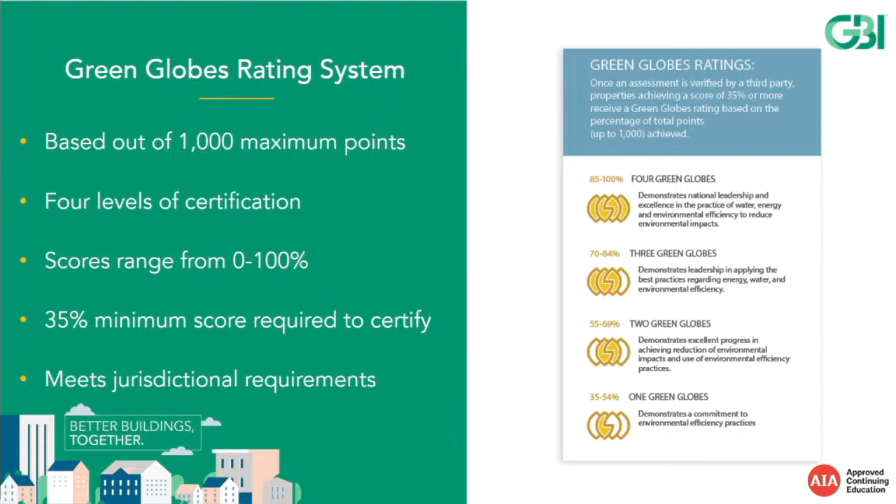And one thing that's really unique is if there is a municipality or a building or a state that wants to make sure that Green Globes is written into the work that they're doing, maybe their ordinance or their code, you have to meet the jurisdictional requirement in order to take your building through Green Globes certification. So for example, if you lived in Timbuktu and they had a very, very high ASHRAE 90.1 standard, we would make sure that you met that and that you're not getting around it just by certifying your building. So we really try to bake in the jurisdictional requirement so it's very holistic, and we're working with the community to uphold the standard that they have in place.

Okay, so I mentioned that we have 3 different programs under Green Globes. Today we're going to be focusing on new construction, and there are 6 different assessment areas under new construction: project management, site, energy, water efficiency, materials, and indoor environment. And this is our point allocation for all 6 assessment areas. Again, this is out of 1,000 possible points. You might notice that in the diagram, the 2 most heavily weighted are energy and water efficiency. That never changes. So while we don't have any prerequisites, you really have to achieve optimal amounts in energy and water efficiency for certification. Okay, diving into the fun stuff.

So the first environmental assessment area is project management, which gets 10%. We encourage written performance goals to be created by the team and owner group to be set at pre-design, so at the very beginning while you're thinking through your project. And that would include site design, environmentally responsible construction activities, water conservation, building envelope and moisture control evaluation, energy efficiency, materials, and indoor environment, all to be considered.

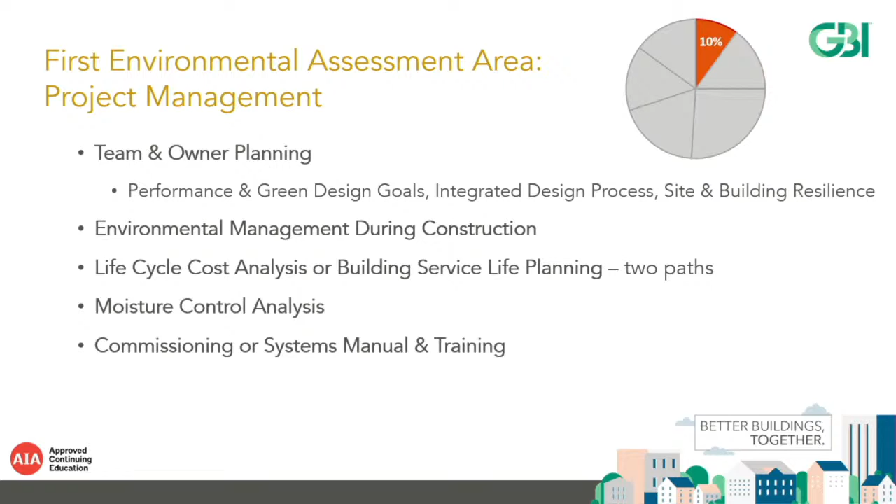So that's at infancy. We also require building risk assessments to be done, which would identify risks to the building, including continued building occupancy resulting from extreme natural events. So we want to look at global climate change, human activity, and the expected service life of the building. We also look at environmental management practices during construction, and if an environmental management system is in place or if it needs to be in place.

And project teams can also elect to perform a life cycle cost analysis or demonstrate a building service life plan. And these paths are weighted equally in terms of points. So we really try to encourage looking at the whole building and its life cycle. We also award credit for performing a moisture control analysis. Again, we look at environments that might be more prevalent in areas like Florida. And project teams can choose either a building commissioning and training pathway or a systems manual and training pathway.

You don't have to do all of the above. Okay, so this is just an example. I tried to find what project this is from.

David, maybe you might know. I was looking out the window. It almost looks like New York, but I couldn't quite tell.

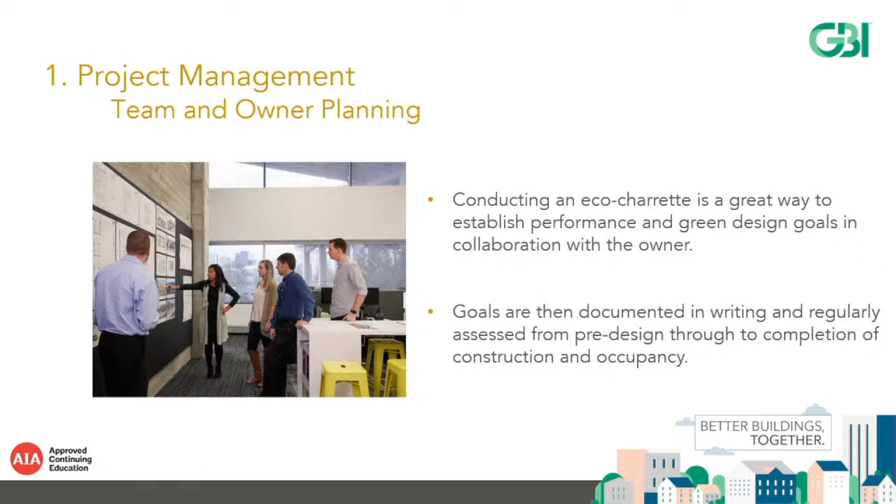An eco-charrette meeting with the building owner and various disciplines is critical at the beginning of design, as I mentioned, as they can dictate the sustainable vision for the entire project and life cycle of that building. The owner has functional goals for the project, of course, and that's based on the building type, the location, and their budget. And it is important to incorporate sustainability goals by weighing cost and the different benefits of the design elements that they're considering.

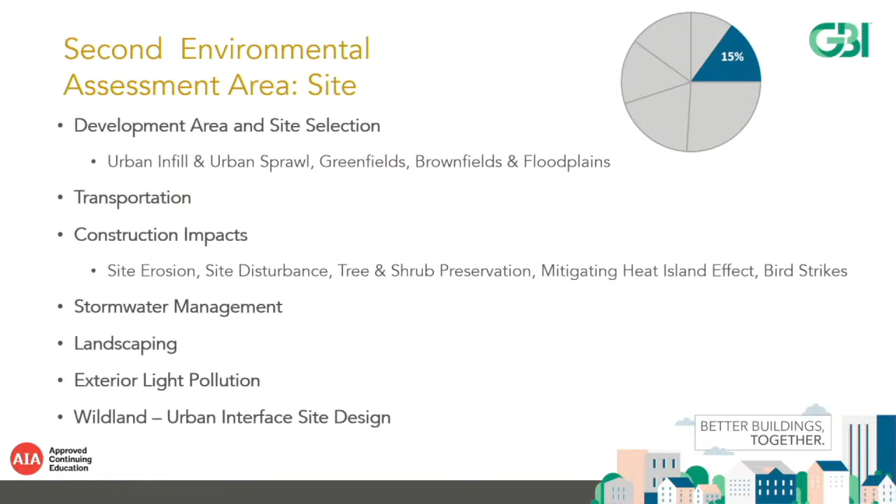Okay, so the second environmental assessment area is site. The first section of site is the development area, which evaluates various aspects of site selection, including consideration of urban infill and urban sprawl. Project teams are incentivized to choose a site that was previously developed and has been served by existing utility and transportation infrastructure, a brownfield or remediated Superfund site, and avoiding sensitive sites and different floodplains. If you build on a floodplain, that might be a little bit of an insurance disaster.

Transportation includes distance and feasibility to public transportation. And obviously, we're looking for methods that reduce dependency on single occupancy vehicles. I mentioned I work in policy. For whatever reason, 2021 was the year of EV charging stations throughout the country. Every state wanted to have different charging station laws that went into place during legislative session. So we were really happy to see that it's not just in certain areas like California and Utah that are very advanced in their different energy efficiency laws, but also down south where I live, we're also seeing a lot of EV charging stations put in place, which I'm quite proud of.

All right, construction impacts evaluate the measures used to minimize disturbance to the surrounding site, the protection of existing trees and shrubs, mitigating heat island effects with vegetation, shaded or high SRI roofs, and permeable surfaces, and measures that would address bird strikes. All right, so this is just a great example of someone putting a green space on their roof.

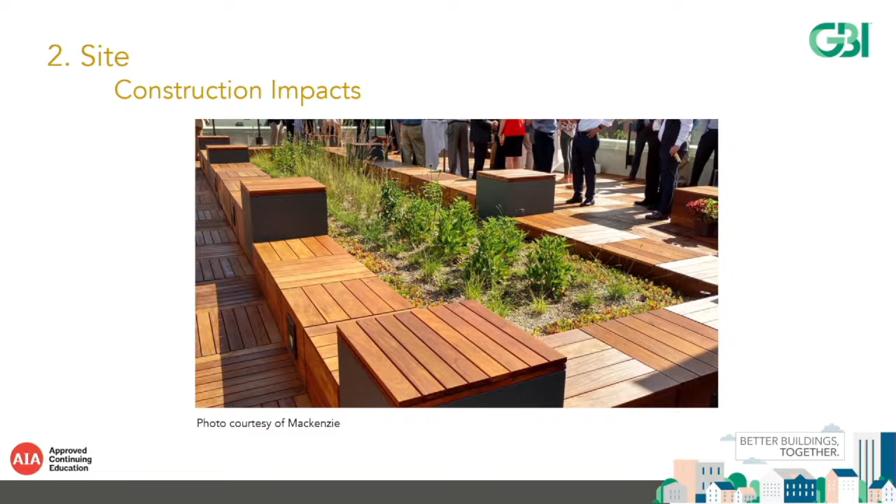We're currently doing some work in Boston right now, and one very cool thing that they're doing is putting beehives on a lot of buildings. So there's a portfolio that's building out, and they have beehives on each. So folks are getting really creative with the way that they're working with their space and using their roofs, and obviously we're quite proud to see that. A heat island effect can contribute to overwarming of buildings in warmer months, adding considerably to the cooling load, which increases the energy use. So we really like to see things like this.

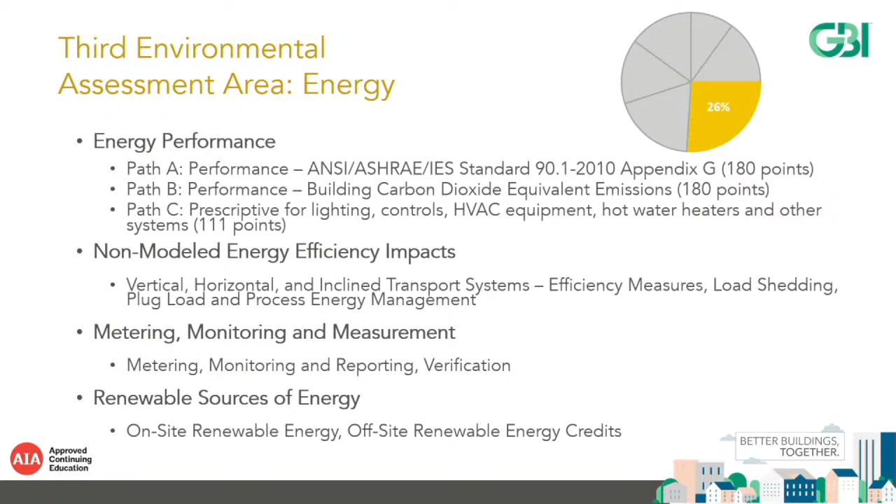All right. The third environmental assessment area is energy. I mentioned at the very beginning, this is what is most heavily weighted, and there are 3 pathways for assessing energy performance. Path A would be using ANSI/ASHRAE/IES Standard 90.1-2010. Again, if you're in an area that has a higher 90.1 standard in place, you still get full credit for just meeting 2010. We want to see folks go above code, obviously, but you would be rewarded a full 180 points. Performance path B would be building carbon dioxide equivalent emissions, which would also get you that 180 point threshold. And path C would be more prescriptive for lighting controls, HVAC equipment, hot water heaters, and other systems.

Non-modeled energy efficiency impacts are also evaluated. So think of things like elevators, escalators, and moving sidewalks if applicable. Lighting and HVAC systems capable of load shedding, appliances and equipment organized by location, and energy-saving power strips and occupancy sensors are all looked for as well. Additionally, credit for the implementation of a policy for all purchased equipment to be ENERGY STAR certified or meet another equivalent energy efficiency standard is awarded.

Projects earn credit for a percentage of the building's total site energy that is metered through building level energy meters, and there are 3 pathways for achieving credit for submetering in this assessment. We also look at both on and off-site renewable energy sources in the energy environmental assessment area.

Okay. So in the example projected on the screen, submetering was used in each tenant space to inform occupants of the rate of energy use and to incentivize them to reduce energy on demand. Generally, if occupants are made aware of how much energy they are using and paying for, they're more likely to

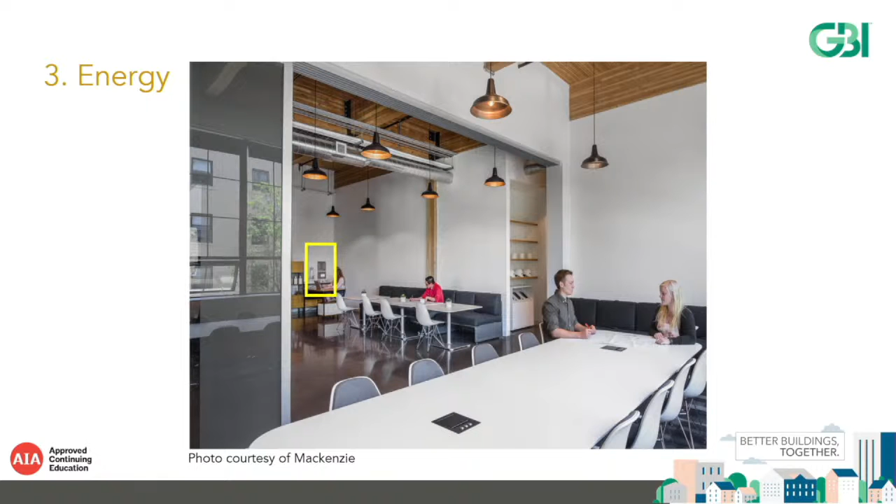conserve it. This reminds me of being a little kid and my mother telling me to turn off all the lights after I leave the room. Do you guys? Yeah, okay. I'm glad you both experienced that.

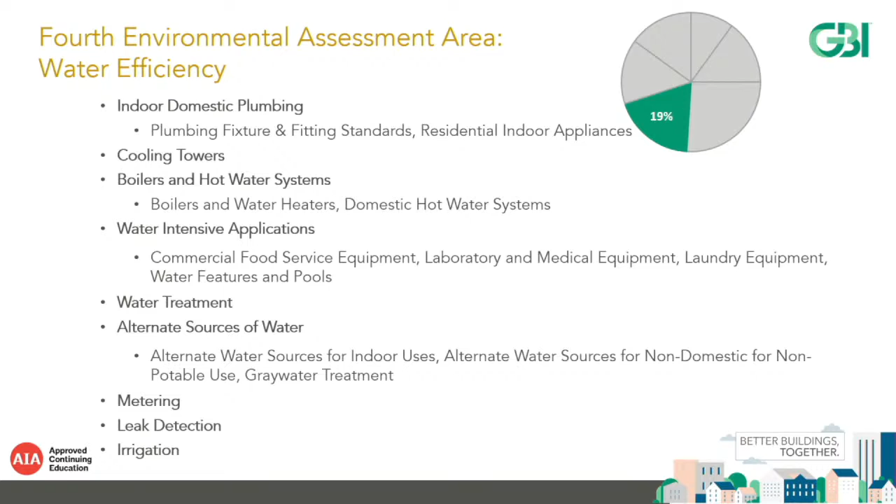All right, the 4th environmental assessment area in Green Globes for new construction is water efficiency, which is right behind energy for weighting. It's 19%. Water conserving fixtures, including WaterSense certified plumbing fixtures and ENERGY STAR appliances with low water factors, are always encouraged, as are cooling towers, boilers, and hot water systems, water intensive applications, including commercial food service equipment, laboratory and medical equipment, laundry equipment, water features, and pools if applicable.

Water treatment methods, alternative sources of water such as gray water and rainwater are also looked for, and submetering for all water-intensive indoor applications and potable water used for irrigation are also looked for. Credit is earned for meters and submeters that are linked to a meter data management system to meter consumption.

All right, so we actually awarded this project a Green Globes Award in 2021. It's quite unique, and they harvest all the rainfall in the ponds that you can see, and those are used to provide 100% year-round irrigation and flushing toilets, which is very cool.

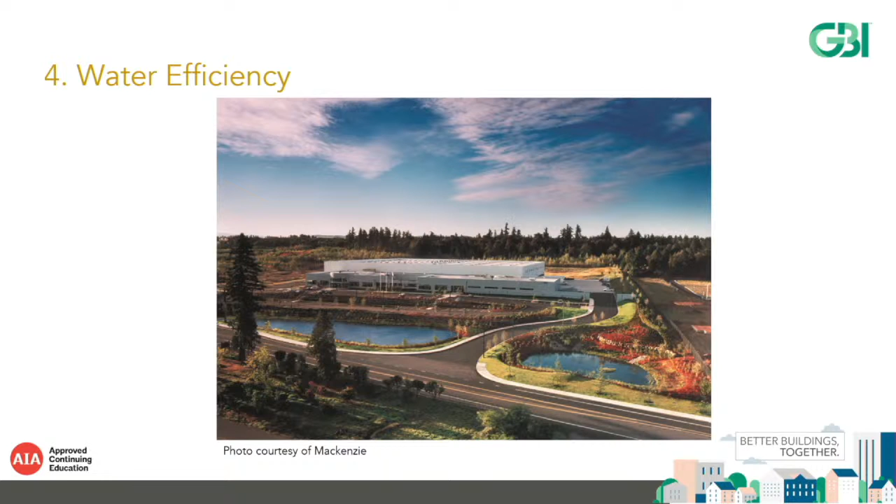All right, the fifth environmental assessment area is materials. Green Globes really encourages life cycle thinking from project conception. The first section evaluated is whole building life cycle assessments, and it evaluates reductions in environmental impact. Projects receive credit once 15% reduction in environmental impacts are demonstrated and can receive credit for 20 points or at least 25% for greater. Product life cycle is next under materials.

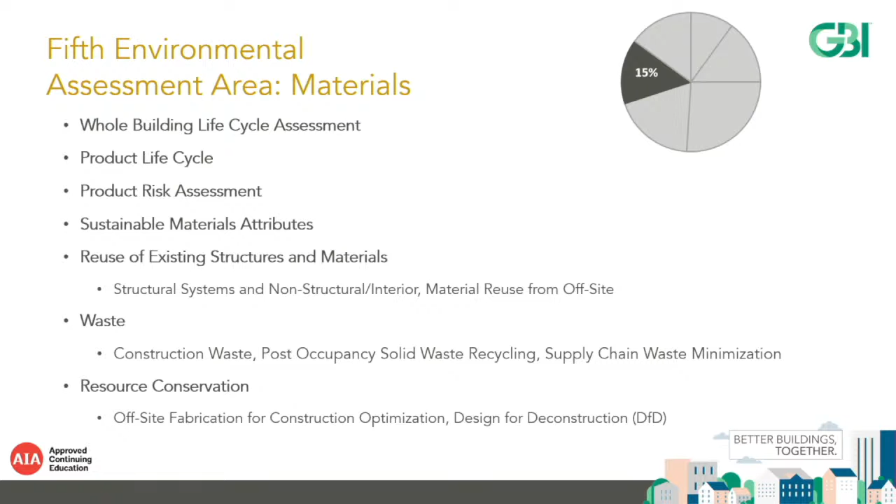We look for third-party verifications or certifications that evaluate cradle-to-gate product life cycles. Credit is also earned for sustainable material attributes based on the Sustainable Materials Index, or SMI, and the reuse of existing structures and materials are also evaluated as a percentage of structural systems and non-structural systems that are on the interior space.

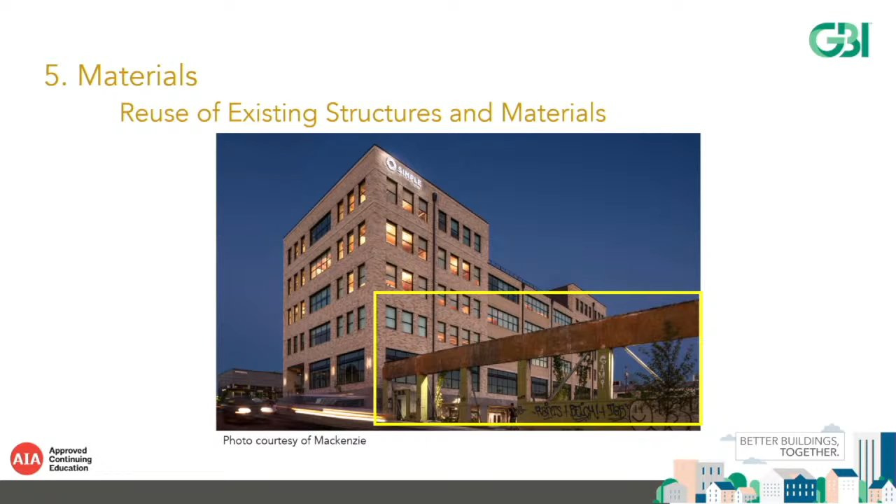All right, the building on screen was also built in the same space as the last picture, and it was on land that had a building. It was a warehouse that had been burnt down, and they used what land was destroyed and built up this structure that you see here. Many portions of the pre-development project were salvaged and reused and incorporated in the new building design.

The partial facade of the previous building was used as a screen for the on-site parking area, and actually this is in Portland, Oregon. They managed to save all of the graffiti because they wanted to give the building character, because they gave the space new life after that fire.

All right, the sixth and last environmental assessment in Green Globes for new construction is the indoor environment. Air ventilation and quality are the quantity of ventilation compliant with one of 4 standards or local codes. Air change effectiveness, air handling, equipment filtration, and CO2 sensing and ventilation control equipment are also evaluated in this section.

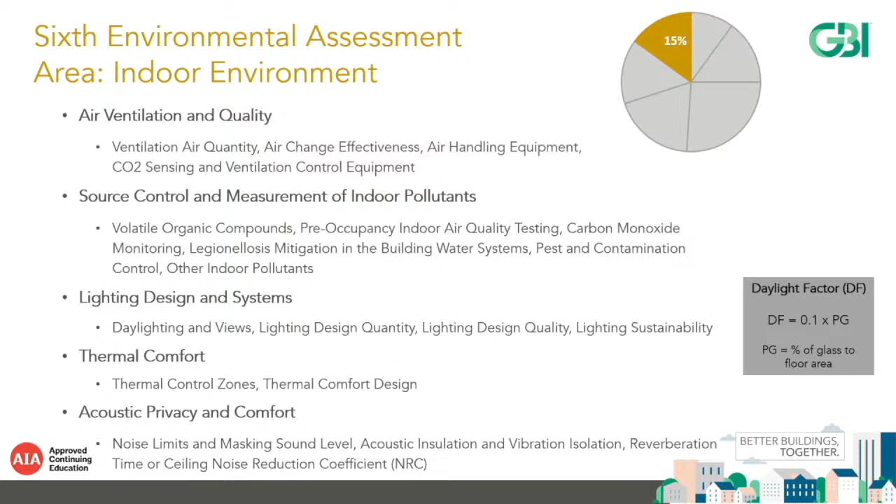Source control and measurement of indoor pollutants include evaluating and encouraging reduced volatile organic compounds, and there are 2 paths for achieving credit for pre-occupancy indoor air quality testing. So either carbon monoxide monitoring or evaluating if water systems have been conformed with ASHRAE 188-2018. Lighting design and systems are also awarded and encouraged.

Think of things like daylight. I remember when I first got into efficiency, circadian lighting was like the buzzword. So we really encourage lighting designers to have their footprint on the space as well. And we award for that. We also look for thermal comfort zones and acoustic privacy and comfort zones, including noise limits and masking sound level.

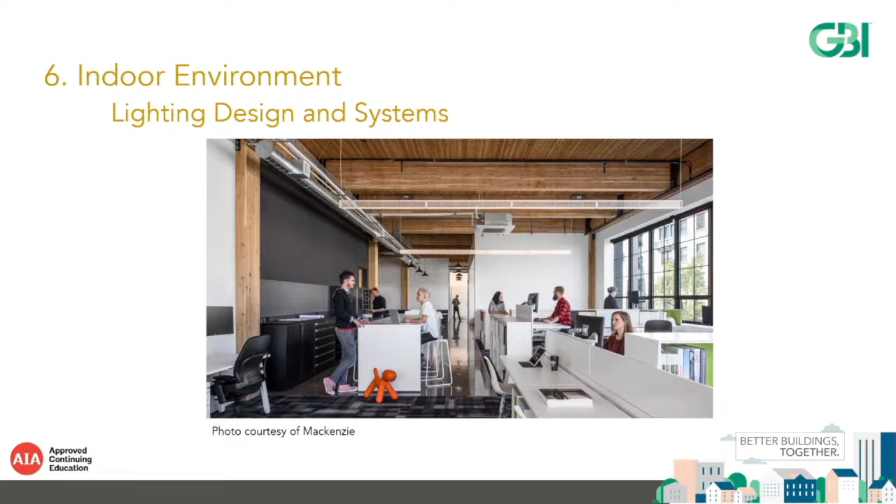High ceilings and high windows allow daylight to penetrate deep into the space. In this example, lighting controls automatically sense daylight levels, brighten when the sky grows dark, and dim when the sky brightens as well. These controls reduce the need for artificial lighting and thereby reduce energy consumption.

I work from home. I have a home office. We went fully virtual in 2013, and I do not have this type of daylighting, and I so wish I did.

And while we look at square footage for pricing, a new construction building that wants to go through Green Globes normally is at a price point of about $14,000, which is quite low compared to other certification systems currently at market right now. So we offer a few different resources through GBI.

Every building that goes through Green Globes certification is awarded a project profile. So we have a professional writer that comes in and authors a piece about the space. We also photograph it and we use it as a marketing tool, and this is free of charge. So it's really something that's unique.

Folks will often use it if they're in a university system or if they're sharing in a community what they've done on a whole portfolio. We really want to try and encourage them to take advantage of what we can do. If you're curious, we have a lot of our different buildings that have gone through certification for new construction on our project profile directory on our website, and you can tailor it for different certification types or area.

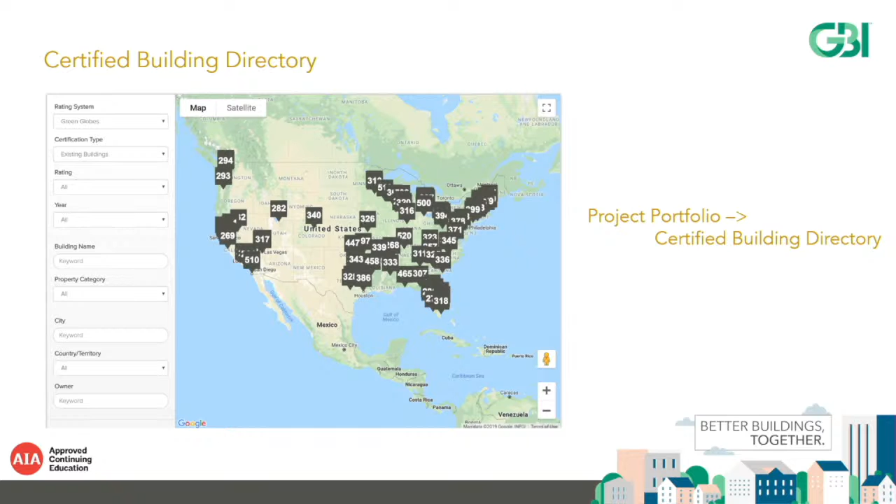So if you wanted to look at Utah and see some of the work that's been certified, you're welcome to do so. And again, we have a certified building directory as well. So if you're just curious to see the different buildings, I just looked at North America, specifically the United States here. However, we do offer different ways to check out the buildings that we've certified and if anything around you has been certified as well.

I mentioned our fee structure, but again, it all depends on square footage. And really what we see now, I checked again this morning, it's right at about $14,000 to certify through Green Globes for new construction. You can see here that we have a design review assessment and final assessment. We have something called a Green Globes assessor, which is someone that has 10 plus years of experience in engineering or architecture, and they work with the project teams through certification.

And what I think is really cool is when they're doing these design review assessments, they often can point out what project teams can do to be more resilient, more efficient. They can definitely suggest different changes so that building types can do as much as they can to achieve optimum energy savings. So it's really something that is quite collaborative.

And then we definitely send them out. That assessor travel is something that we have as a flat fee, and they come out and do that final assessment at the very end and work with the project team. So we don't expect folks to certify in a black box. We really encourage them to be as collaborative as possible.

Our client service team at GBI works with every project very, very closely, which David can attest to. And so it really is a collaborative process. No one's alone in certifying. You have either your assessor who you can contact, and they're normally familiar with a different space, or you can work with GBI directly through our client service team.

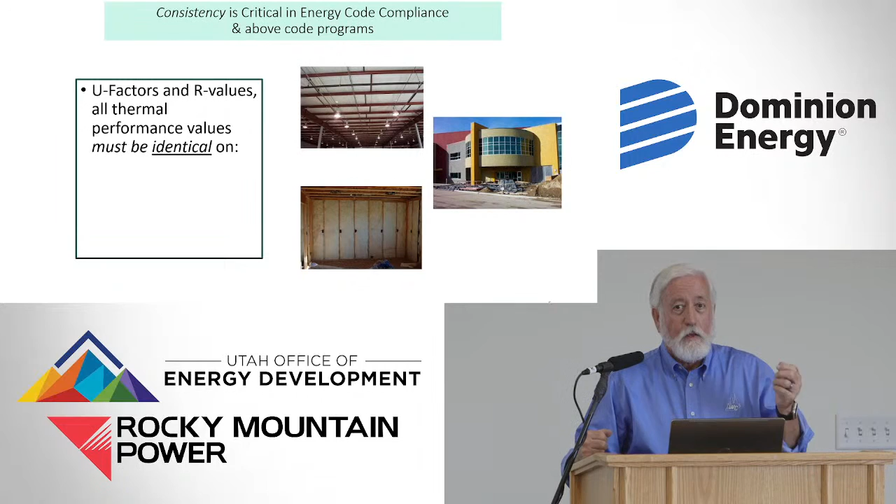Okay, my soapbox, and Carl and others that have heard me talk before know that I will jump up on a soapbox and I'll say our biggest problem in building buildings efficiently and accurately is to have complete construction documents. And I love the process that you have to go through for Green Globes, because we make sure, and there's checks and balances.

I've done inspections. For those that don't know, I was a HVAC contractor for 33 years, and then I was a building inspector for 13 years. And I've done inspections, and I get to the end of the building, and the windows are wrong, or the HVAC system has some deficiencies, and it's all done. And whether it was the ME or the architect or the contractor, someone made a mistake along the way. And if we don't have good, complete construction documents, and that's not just the plans, but it's all the associated documents. In fact, you have a whole list, and I think I grabbed that slide and maybe even have it in here. If we don't address all those things, our project is not going to be the project we want it to be.

As a contractor, there literally were jobs that I wish when I was approached to bid that job that I'd written them a check for $10,000 and said, go get someone else to do it, because everything was wrong with the project. The documents weren't good, the supervision was horrible, everything was poor on the project. And so the project was just a pig that everybody lost money on. And so it might look like a lot of steps you have to go through, but they're so important. We're bringing hundreds and thousands of people together to create this building, and if we don't have a plan and a process, we're not going to get it right.

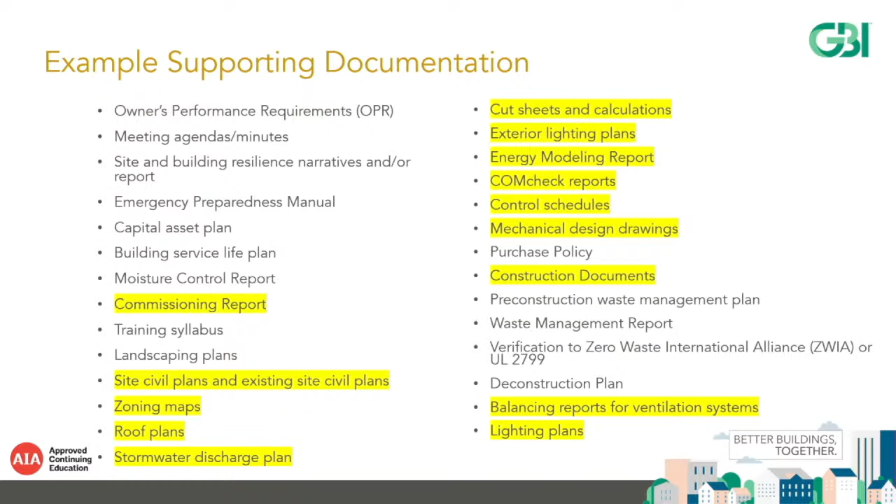And here's your list. And I highlighted things that I look for. You know, I've done some third-party plan review. I still do some since I retired from the county. And these are all the things I look for, you know, and they're on your list and they're on my list. These are important things.

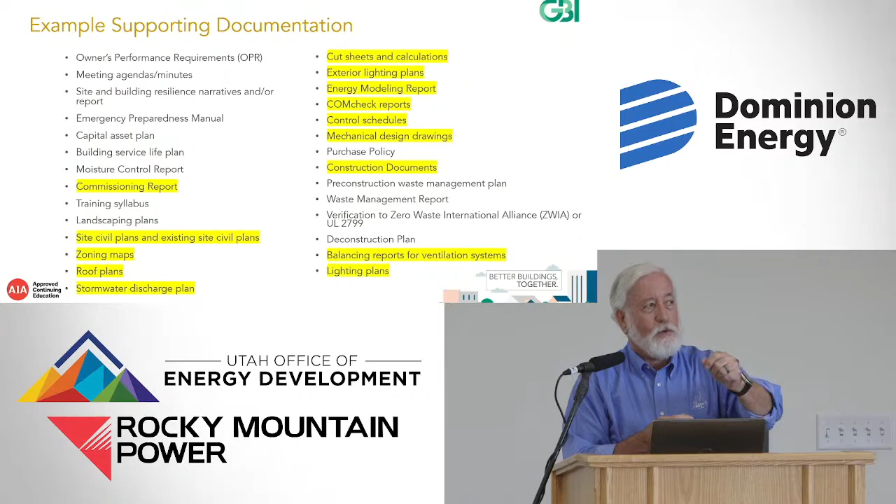Balancing reports for ventilation systems, you talked about that. You know, we have this challenge, and you two were talking about it with COVID. Some people went overboard and brought in way too much outside air, and the systems couldn't handle it, and the equipment couldn't handle it. So we have to be a little bit careful on that. In fact, bringing in too much outside air is just wasteful.

So we have balance points all over the place. We have to spend some energy for comfort and health, and we have to be mindful that the energy code recognizes that and doesn't get too rambunctious on that. What I'm trying to cover today, I could take 2 days, so I'm just going to go real quick.

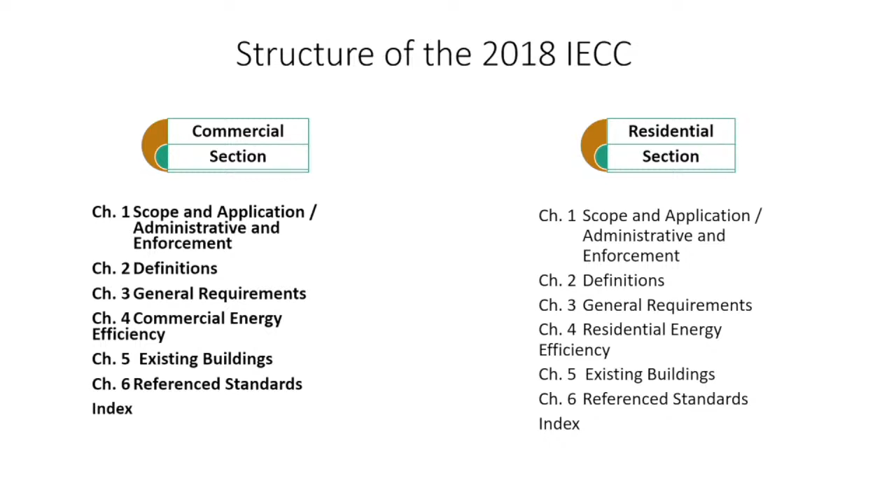The structure of the IECC and the structure of ASHRAE is not that much different. IECC is divided into 2 sections, a commercial and residential section, and they are like any other code. We have Chapter 1 administration, 2 definitions, 3 general requirements, 4 kind of the meat and potatoes of the code. And then fortunately, a couple of code cycles ago, we were able to remove existing building requirements and put them in a single chapter. So if you're doing that building remodel or alteration, you have one place you go to and you identify what you have to do rather than trying to piecemeal pick it out of the code.

When does my building need to comply with the commercial provisions? And we're talking a commercial above code program here. As I looked through your slides, you have certified or recognized a lot of apartments. Well, is an apartment residential or is it commercial code? Well, ASHRAE is the one that started this. 90.1 is for commercial buildings except low-rise residential.

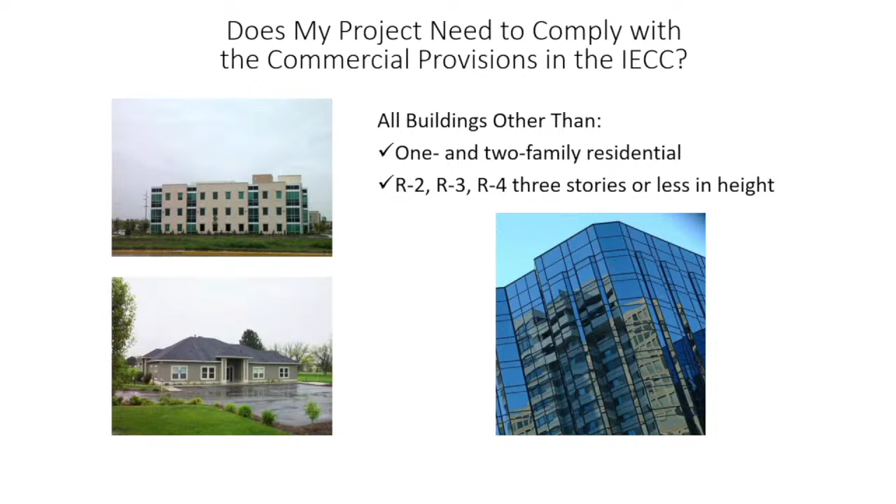So by definition, for both ASHRAE and IECC, a commercial building is any building other than a 1 and 2 family residential building, R-2s, R-3s, and R-4s, 3 stories or less in height. Let me simplify that because most of you don't know what an R-2, 3, and 4 is. Basically, a hotel and motel is an R-1. Every one of them is commercial no matter what.

The 2s, 3s, and 4s are apartments and boarding houses and stuff like that. If they're 3 stories or less, they have to comply with the residential code. If they're 4 stories or more, they have to comply with the commercial code. 1 and 2 family residential, of course, that's a residential building. And people will say, well, what about townhouses? Townhouses are single family dwellings with a 0 lot line, so they always fall under the residential. So we're talking the commercial.

But our commercial can get a little bit interesting sometimes because it's very popular right now to build a 1, 2, or 3 story building. Sometimes we have some retail and some rental units on the same level, or we go up to 3 levels. Well, if you have that building 3 stories or less above grade, you do those levels that are residential dwellings out of the residential energy code, and you do the retail space out of the commercial code. It gets a little confusing, but oh well.

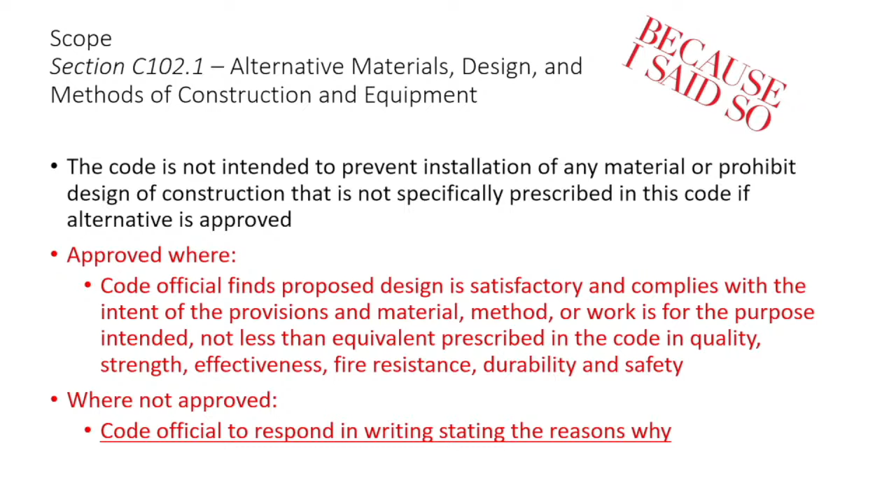I'm not going to read this whole thing, but this is one of those things that I fought for in code development that I thought needed to be there. The beauty of above code programs is that they give you some options and some flexibility. Well, the code is not intended to be the only way you build a building. The code says we're not trying to prevent using a different method. All you have to do is submit it and get it approved.

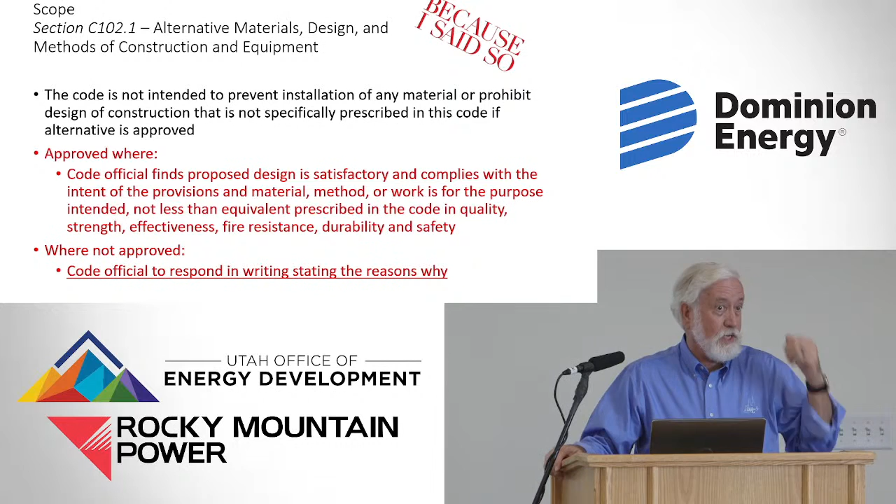For a long time, I had people call me that wanted to do something a little bit different. They submitted it to the jurisdiction, and the code official would say, nope, I'm not going to accept that. And they say, well, why not? And he says, because I said so. Does that sound like what my mom said to me years ago? The code now says that if the code official doesn't approve that, he or she has to state in writing why. And I think that's a good addition to the code.

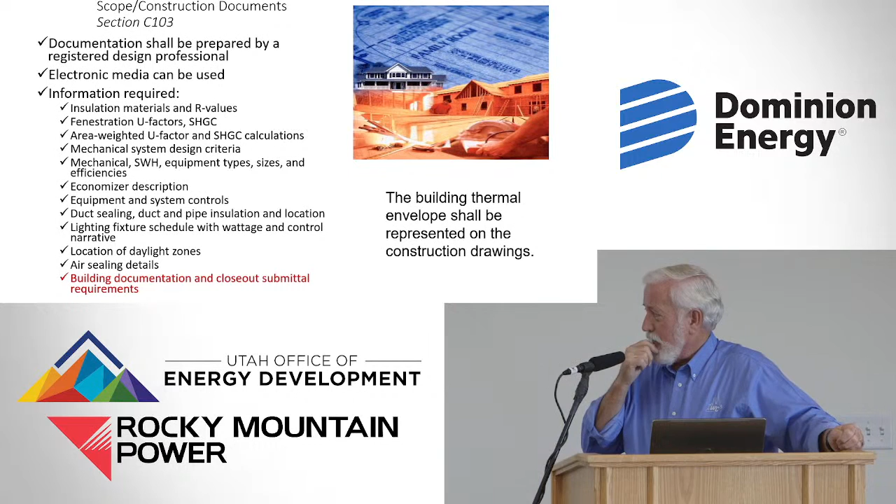Here the code identifies all these things that should be on our documentation. And you notice some red. That means that is a new change in the 2018 code, which is the last code that we adopted.

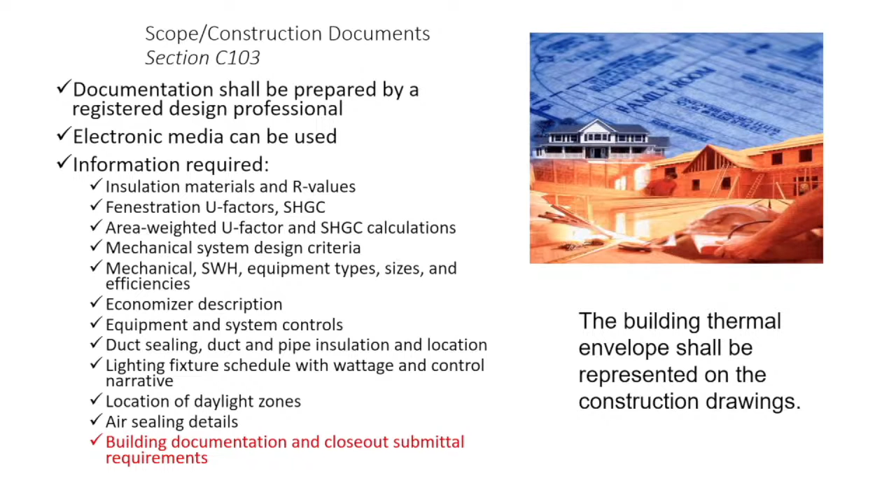And there is a big push on our larger commercial buildings now, and the code has recognized it, that we need building documentation, we need commissioning and all that stuff, and it needs to be submitted as we finish up the building. And also that we identify the thermal envelope.

I have to throw in a word about the building thermal envelope. We have COMcheck, we have, ASHRAE has, you know, Appendix G, they have a number of methods that you can comply with the code, but every one of them looks at the thermal envelope. What separates conditioned from unconditioned space?

And we talked earlier about air leakage, infiltration. Well, we need to identify on the plans now where that air barrier is, where are we stopping air leakage? And so that's an important thing that we think about. Don't build a building, pressurize the building, find the leaks and go fix them. Let's identify where it is so that we know what steps we have to take as we move through.

So how do we comply with the code? We can use ASHRAE 90.1, and currently in Utah 2016 is the adopted version. Or we can use IECC, and we can basically go the prescriptive approach, and we're going to talk a little bit about that. And when we do that prescriptive approach, you go through, you comply with everything, and then when you get finished, you have to pick one additional efficiency feature. And we have a whole list there, and we added 2 more in 2018. And so I think we have 8 of them now.

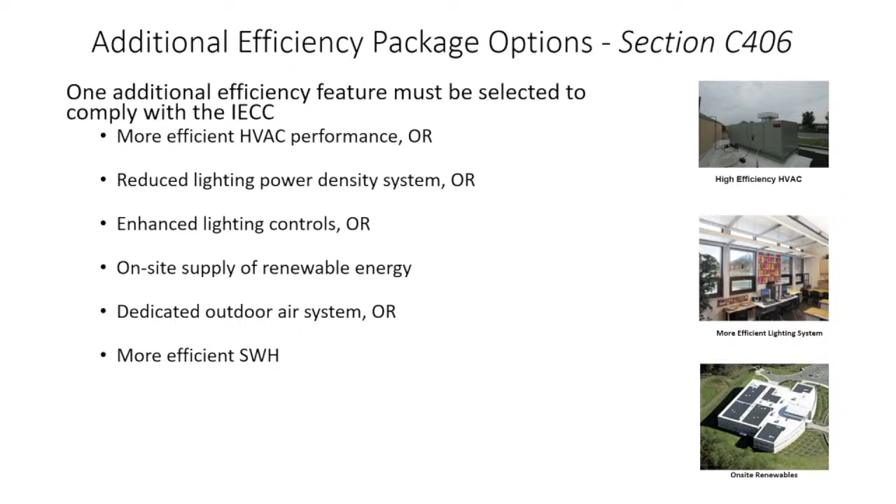More efficient service water heating. This is only available for uses that use lots of hot water. Hotels, motels, maybe some schools. It's not available for everything. So every one of them has some qualification requirements on it. Enhanced envelope performance, which means you're going to test the building and come with a lower leakage. Oops. And reduced air infiltration, which are both new in the 2018 code.

So what is the thermal envelope? It's the roofs, the walls, the fenestration, skylights, floor edges, slab edges, below grade walls.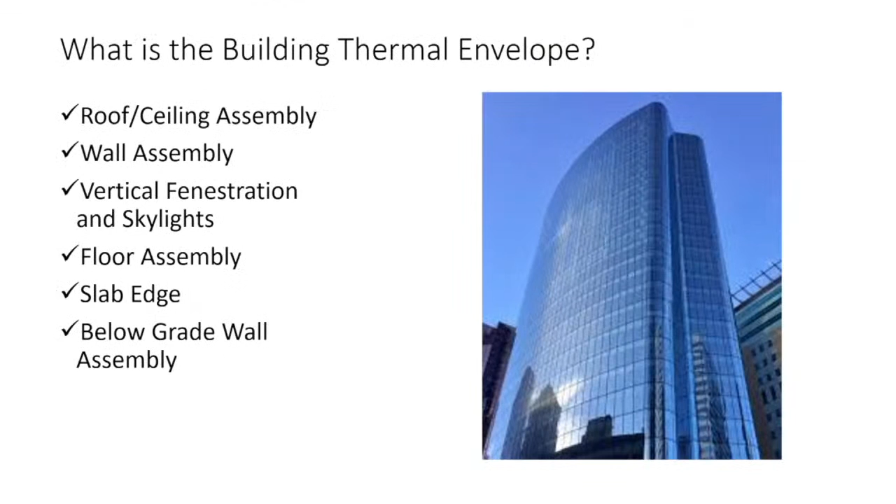I had an apartment project, it was like 6 stories high, submitted for review. I sent it back and I said, you need to put every component of the building thermal envelope on the ComCheck document. And they had left the floors out. It was a podium slab, parking underneath, multi-family apartments on top. And he hadn't done anything for those first floor units that had cold space underneath, cold concrete, cold slab edge on the edge of that.

And finally I called him up and I said, this is the 3rd time and you still haven't addressed it. And he says, I can't. And I said, well, why can't you? If I put it in, it won't pass. I won't say exactly what I thought, but you can guess. Of course it won't pass. You left out an important component of the thermal envelope.

ComCheck or any system doesn't know what the building looks like. You have to put in what the building looks like, and you have to put in all of the components of the thermal envelope, or it's not right. We don't get the right building. So with that type of application, we have a problem because we have a slab edge that's really hard to insulate, and a floor underneath that's kind of hard to insulate. But we need to be thinking about it.

I'm just tickled to death because I started on the code enforcement side in 2005, and we really struggled with concrete buildings, tilt-up buildings, and CMU and all those things. And I'm seeing so many tilt-up buildings now that they're sandwiching foam between 2 layers of concrete, a structural layer and then just a cladding layer and structural foam, and it really makes a great envelope. It doesn't leak air at all, and it has mass, and it has good insulation. So we are making progress. It's just taking a little while to get there.

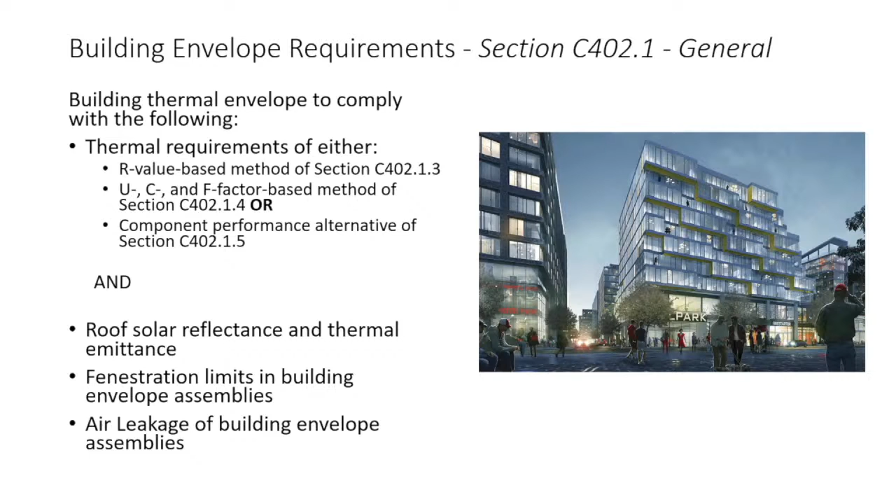And so how do we comply with the IECC? We have either an R-value based or a U, C, F factor based or a component modeling approach, and I mentioned this at the first, prescriptive covers the first two, the R and the U. And then we have some very specific requirements for roof reflectance and fenestration limits and air leakage. So here's our options. And we have similar options in ASHRAE.

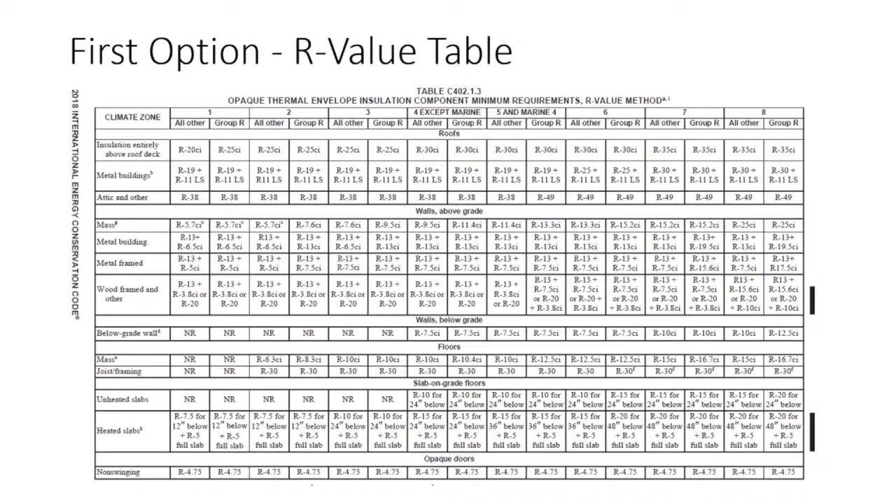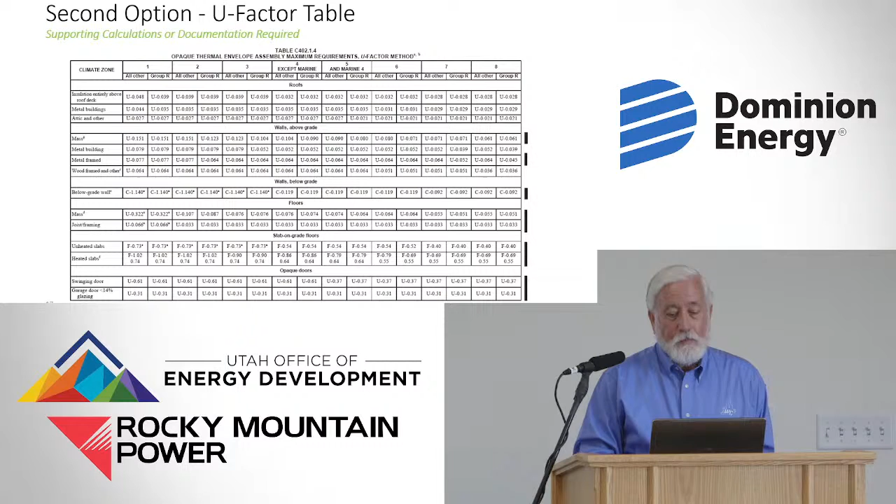You can't just do the inverse of, say you put R19 in that wall, you can't go 1 divided by 19 and get the U because you have the studs that provide some thermal bridging, so you have to come up with assembly U-factors. When we use the term U-factor, we're looking at an assembly, and we have to account for everything in that assembly. And so with a U-factor table, you have to have supporting calculations or documentation to use that table.

There was one R19 batt in a metal building roof system, and they double dipped and tried to, they didn't obviously know what they were doing, which shows a building that's really going to perform great because continuous insulation has what? No thermal bridging. It works very well. So that was a problem.

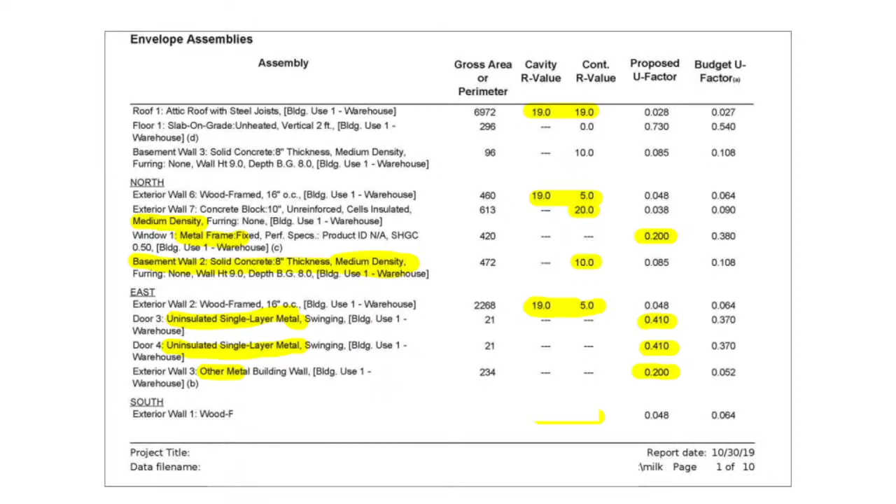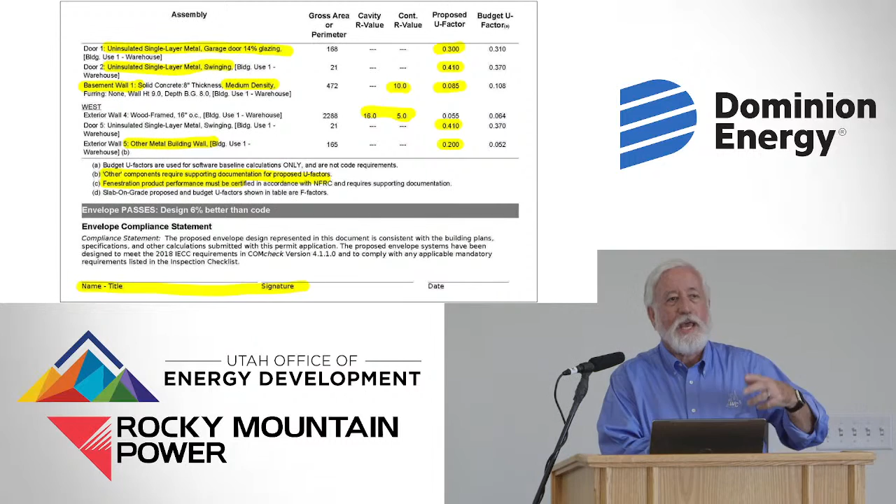Same thing as we go down. An uninsulated single layer metal door with a 0.41 U factor. I don't think so. Then they have other metal building wall, 0.2 U factor. Soon as you see other in a COMcheck, if you'll notice footnote B, other components require supporting documentation. It goes back to the thing. We just can't pull a number out of the air, throw it on a document and say it works. I love the process that you go through of having these checks and this verification as you go through.

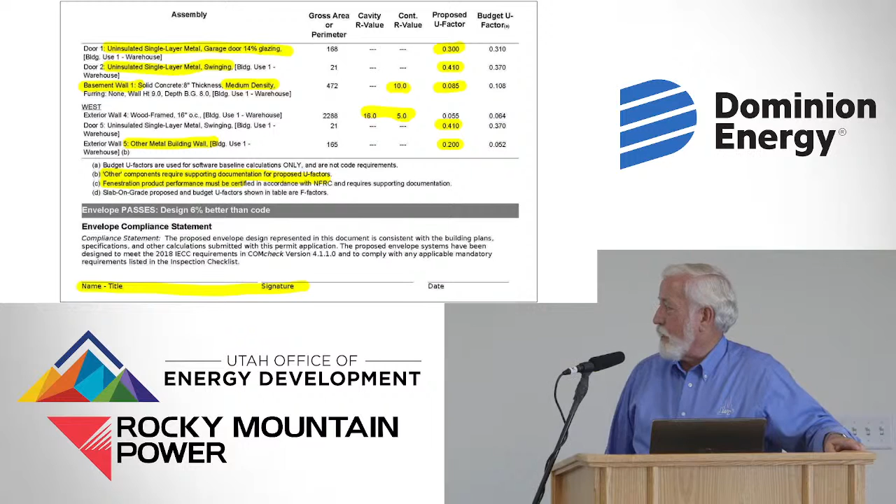Fenestration products must be certified. And then, of course, whoever's stating that it complies needs to sign it. Now, this COMcheck passed by 6% with the ridiculous number for windows and double the insulation in the ceiling. So there's no way that this would have complied.

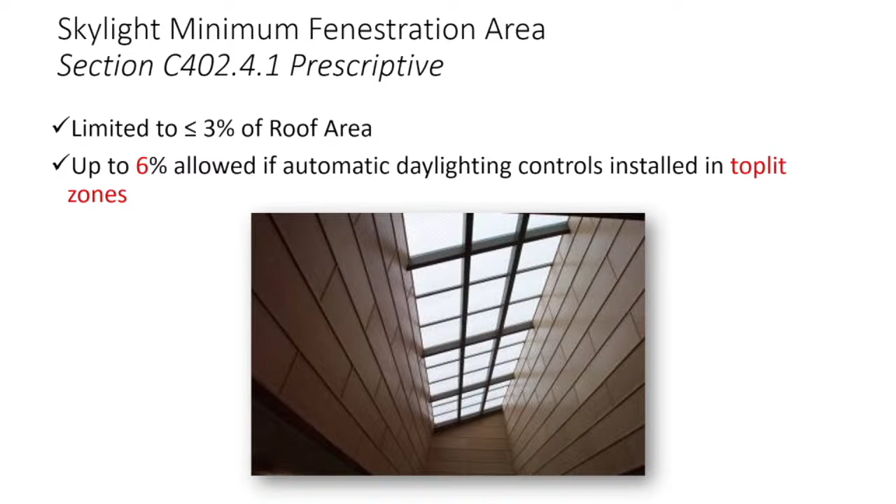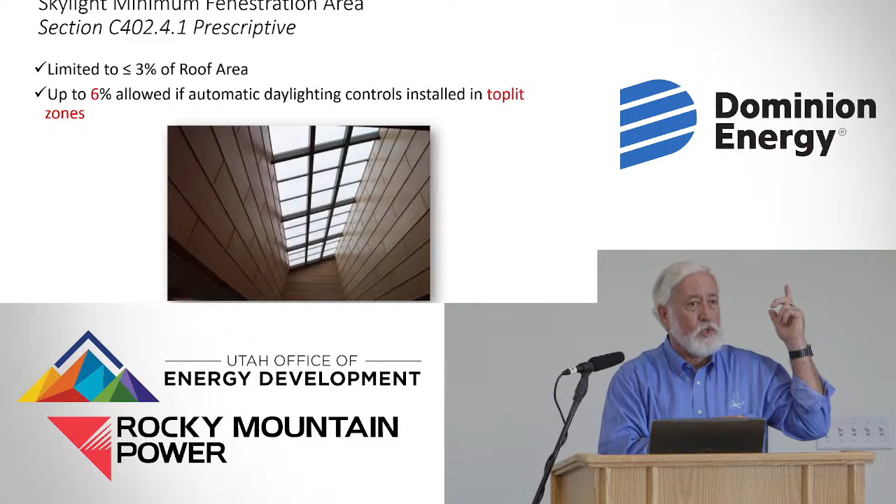And this is one of those things that we're having to make some decisions on. Skylight area and window areas, we have hard limits set in the code. Like one of them is 3% skylight area. But then all of a sudden we now say in the code, you can have 6% skylight if you have what? If you have daylighting controls that step your lights on and off according to how much light's coming through. So it's where the code is looking at both sides of the issue. Natural light is great. We don't need to have all those lights burning all the time. And so the code's doing that in many areas.

So I told you we were going to talk about windows. Fenestration, which is anything we put in a hole in a wall or a roof. It's a window, it's a door, it's a skylight. That's fenestration. The code in ASHRAE, well, ASHRAE is code. The codes all say that we need to have some type of documentation.

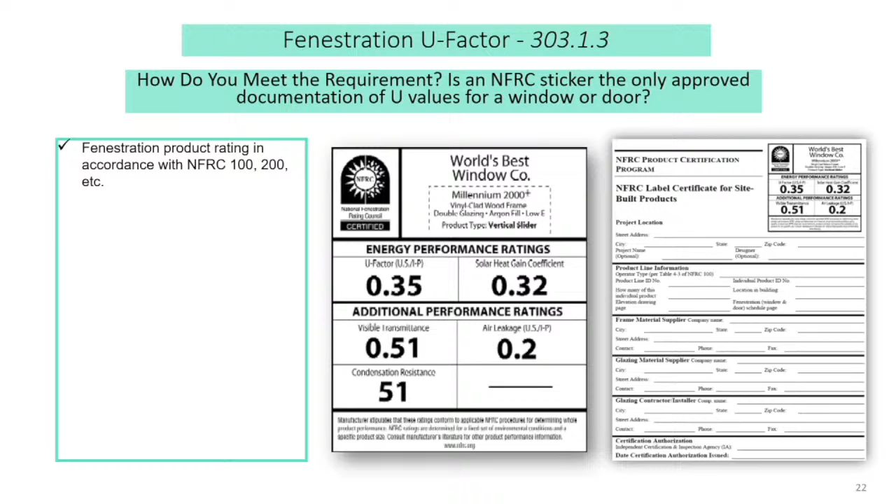If it's a manufactured window, you're going to have a sticker on it like in the middle. And it's going to give you a U factor and a solar heat gain coefficient and a VT number, air leakage and condensation resistance numbers. It's going to give you that because they built the window according to a certain process and it's been certified that way. And it's rated in accordance with NFRC.

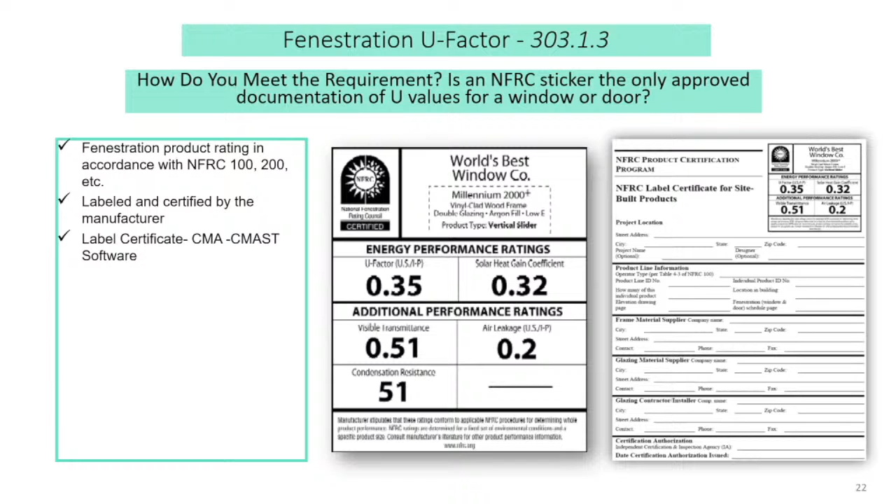If you do site-built windows like we have right here in this space, then we have to come up with a way to identify what the U factor is for that entire assembly with aluminum frames. And so NFRC has a process in place where someone analyzes the windows, the window frames and everything to come up with that. And they have a software and everything. I'm not going to go into detail on it because of time. But in combination of all those components, we can get a certification.

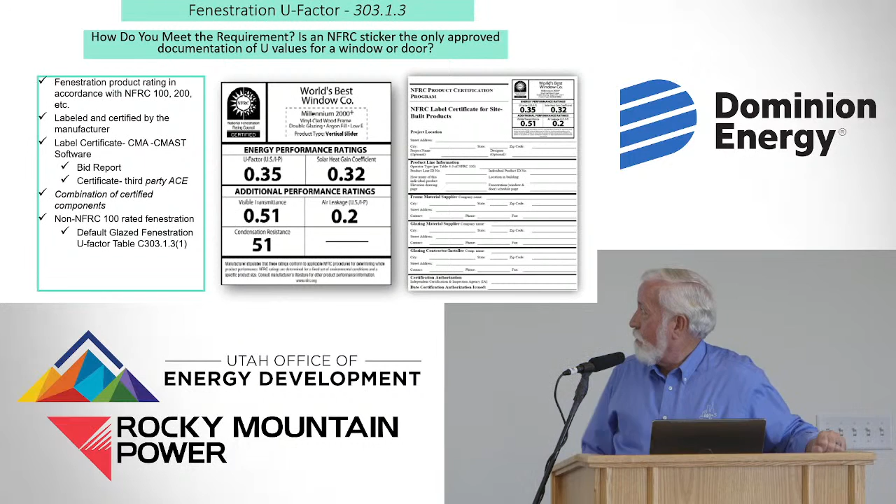So in St. George, the U factor, you can have a little bit less. But in St. George, we have to have a better solar heat gain coefficient because of the sun and the heat gain from the sun. So anyway, remember the number 0.38. Now, I've used Kawneer aluminum frames in this presentation because they have great data that's available online, but it helps drive home. And this was something we really struggled with 10 years ago.

The architect does a good job specifying that we have to have a 0.38 or 0.40 window. And then the window guys say, well, no one's going to check, and so they put, in this case, 451 frames, which don't have a thermal break. So we have that thermal bridge where the heat can easily flow in and out of the window. We have 451T, which is thermal break that has a single piece of nylon polymer, some type of material, to give you a thermal break. And then we have the 451UT, or ultra thermal break, that has double thermal breaks to stop that heat flow and to drive the U factor down where we want it.

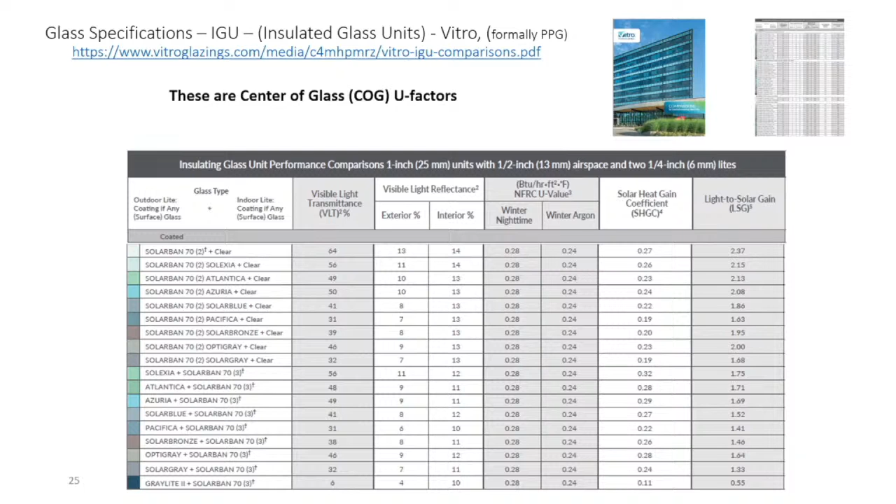So I take these frames, then I go to a manufacturer, and this is Vitro, formerly PPG, and you can go to these tables, and you will see, and this is for the IGUs, those insulated glass units, which you have right here, 2 panes of glass, a spacer, sealed, maybe filled with argon. And they say for center of glass, the U factor right in the middle of the glass is generally 0.28 for all of these Solarban 70 products. So it has a 0.28 U factor. Well, the code says we have to have a 0.38. That's great. We're better. We haven't taken into account the frames because we have a lot of heat flow through the frames.

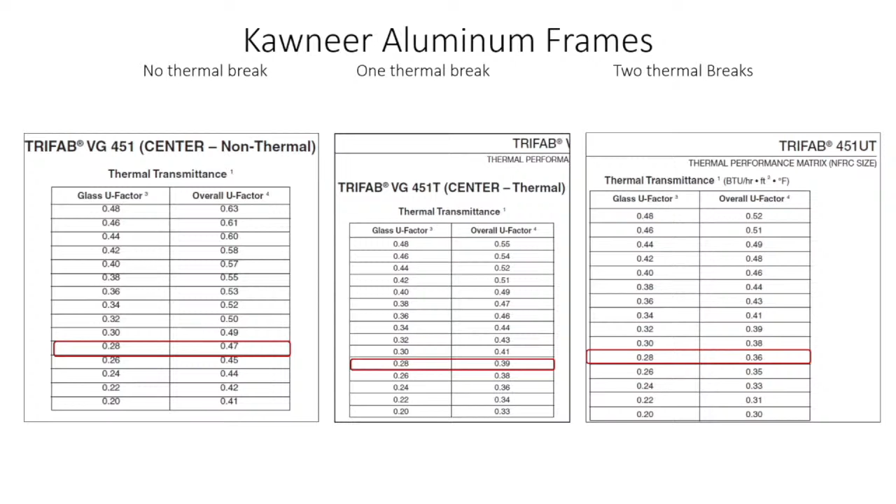So Kawneer takes it a little bit further, and I hope you can read it, but anyway, if you take that 0.28 glass that we just saw on that previous chart, put it in their standard non-thermal break frames, you have a U factor of 0.47. So it almost doubles the heat flow through the whole assembly because the frames are so poor. Now, anybody that's ever lived in Utah in a house or worked in a building that has aluminum frames that aren't thermal break knows when it gets cold, you have frost and moisture dripping and everything running off of it.

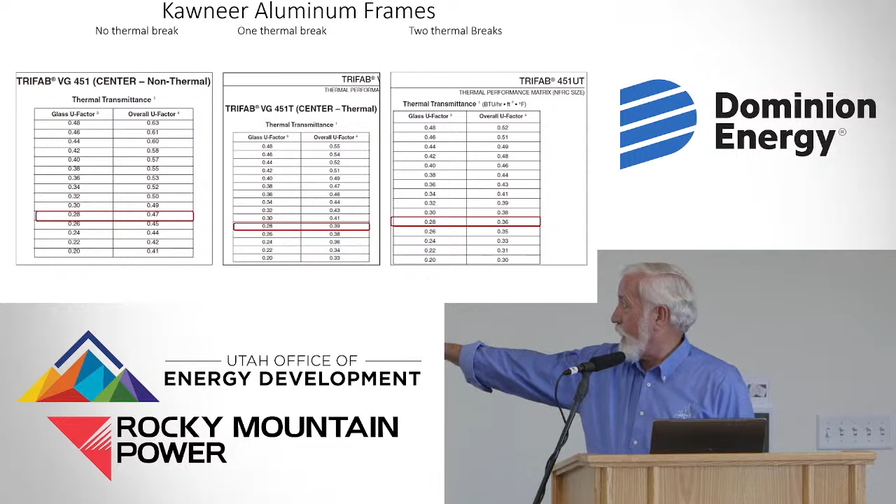So if we go a single thermal break with that 0.28 glass, we're 0.39. We're still 1/100th off of hitting the code minimum. So we haven't met the code. And so if we go to 451 UT with that great glass and a good frame, we barely drop below that 0.36. Where you really get in trouble is when we have a large custom contemporary style home that wants to put storefront type glass in it because the residential requirement is 0.32 and you can't reach it. So it's really a challenge.

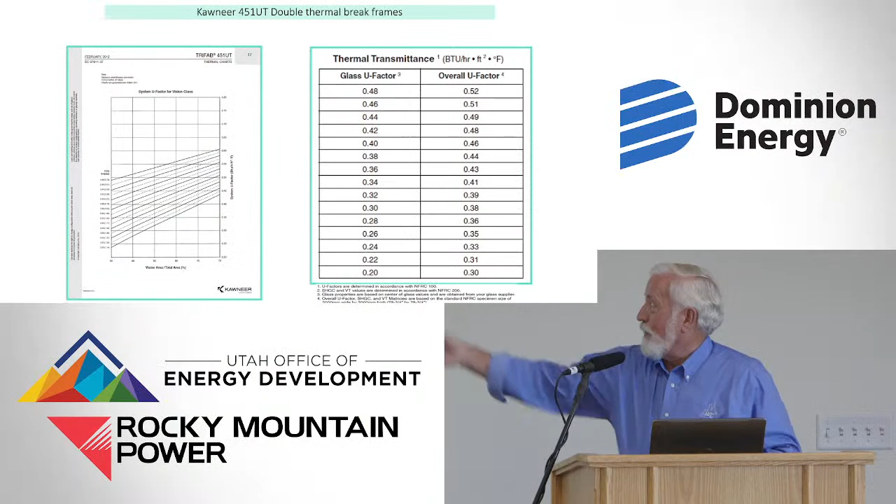All of these things, the above code programs say, do not override; you comply with the basic code. You have to still comply with the basic code, and then you exceed it. They also have a table where you just pick the center, the COG of the glass, and the frame. This is a UT, and it tells you what your U factors are. So if you have really good glass that's 0.2, you can get down to 0.3 on the overall U factor.

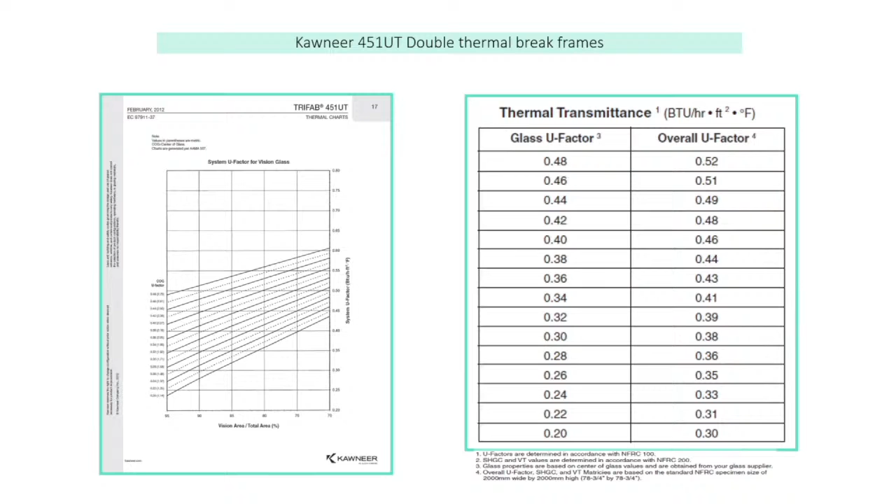With regard to that, those U factors, window U factors, are predicated on essentially temperature, is that correct? The U factor directly impacts the flow of heat. Then is there any accommodation given for the fact that you have differing exposures?

There are three purposes that I know of, maybe four, for a window. It is access for egress, it is for view, for ventilation, and light, VT. So if as an architect you vary that where you have a southern exposure, where you might have a prevailing wind and all kinds of things, you put a baffle or an eave or a host of light, heat reducing elements outside of the window. Why does that still hold, you don't get any credit for that?

So, great, that's a great question. The question is, what about the direction the window faces, if you put some overhangs, if you do some shading on it? Actually, I kind of screamed through it, but if you look further down in this table, the upper one is U factor. Now, U factor just looks at conduction, conducting the heat to and fro. And so we don't care which way it faces, because we're going to look at the solar heat gain coefficient, and we see we have south, east, and west, and north.

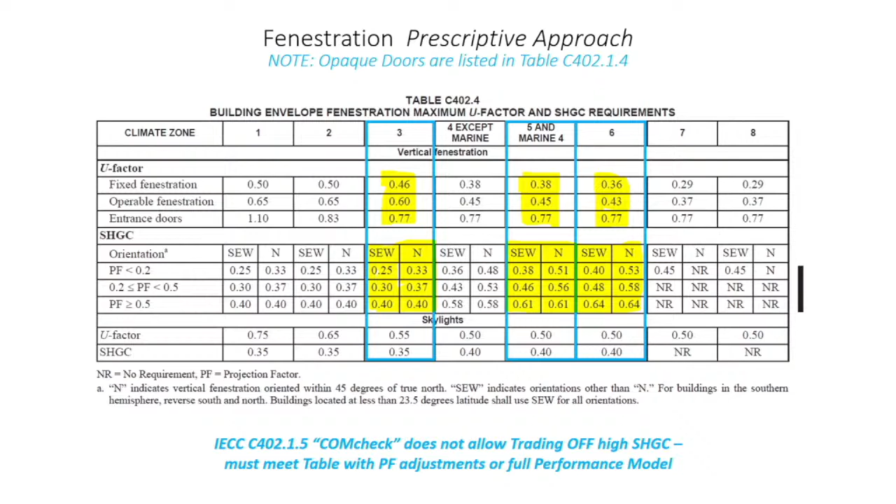And then we also have on the far left, it says PF, projection factor. So this does account for it. I really prefer when I do this slide that I put in a diagram that shows projection factors and everything. But you're absolutely right on track that it's there. Now remember, this is a prescriptive discussion. You can trade some of this off. Maybe you have a big window that doesn't quite make it, but you can make up for it someplace else. And as I see it, your program allows that too.

These above code programs and modeling are starting more and more to recognize that we look at the whole assembly, we look at the whole energy use for the whole thing, and we account for it all. Someone can build in St. George a building with a great view of the Red Rock with a horrible window if they do a whole bunch of other stuff to offset it. So that's a great question. Thank you.

So while I was on that solar heat gain coefficient, I should have said this. SHGC, solar heat gain coefficient, I'll just grab one. It says south, east and west in climate zone 3, you have to have a 0.25 if you have a projection factor less than 0.2. What that 0.25 means is 25% of the heat in the sun rays makes it into your building, 75% gets reflected out. So that's the importance there. Look at north windows. We really don't care so much about north windows. Why? The sun never hits them.

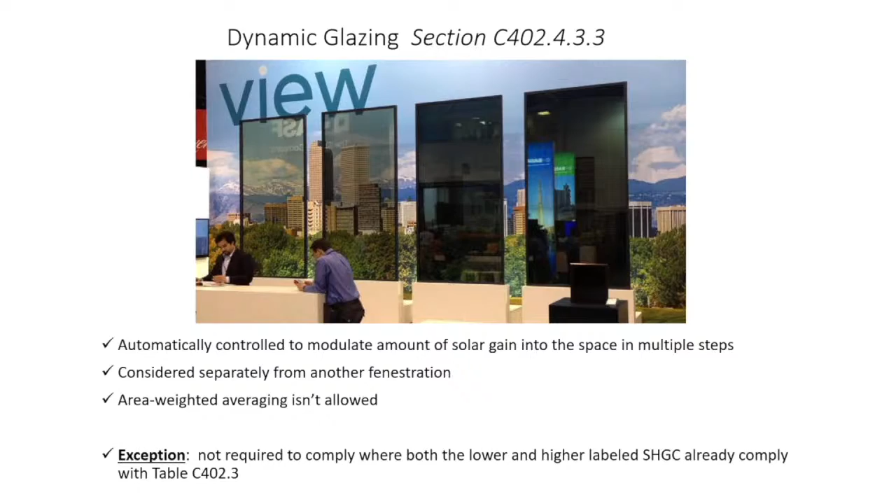They put this in a building and took 60 tons off the chiller size. Now, when you look at life cycle costs down the road, when you can drop 60 tons off your chiller size, maybe this crazy expensive glass isn't such a bad idea. This glass is literally controlled by your BMS, your building management system, and it can darken, changing the solar heat gain coefficient on the side that the glass is facing. So it gives you the effect of an overhang as the day progresses. It's really cool, I have some pictures of it.

They didn't come out as good as I'd like, because as the sun moves across the horizon, it starts with the east, then a little bit on the south, and then the west glass. It literally darkens by putting an electrical charge on a film that's between the panes of glass. Those are all the same glass. The one on the right is taken to level 4. The one on the left is around a standard window, and you can go anywhere in between. I even see ones that darken completely on a home up in Park City that has a great view. They put them around the bathtub so you can have the view all the time, but you hit the switch and the window is your blind.

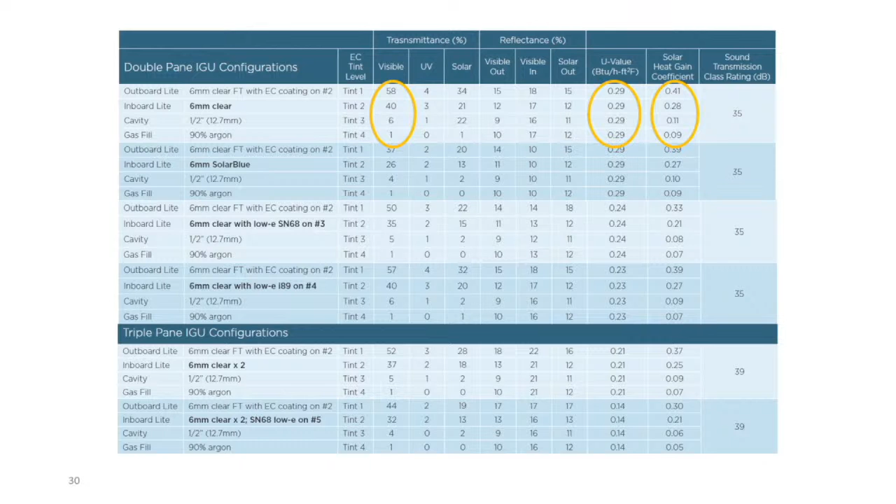So they have a U value as an assembly around 0.29, but their solar heat gain coefficient starts at 0.41, so 41% of the heat comes in, and at full darkening, only 0.09 or 9% of the heat makes it into the space. So it's a really cool product, and hopefully, just like everything else, it'll do like LED light bulbs did. You know, it'll become so much more affordable.

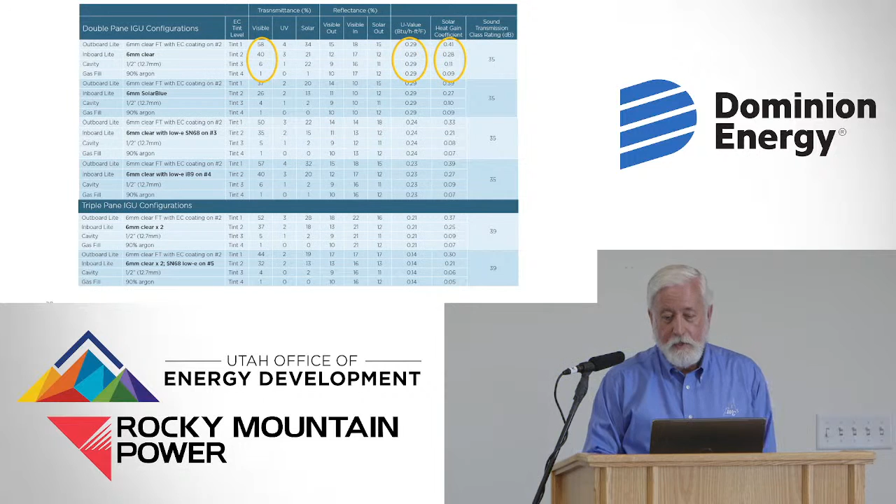I bought some LED light bulbs when I was doing a remodel on my house, and this was like 10, 11 years ago, and I wanted 4 little tiny can lights in a coffered ceiling I built. I think I paid $37 a piece for these little LED lights. I mean, it's crazy what I paid. And what can I get them for now? A couple bucks.

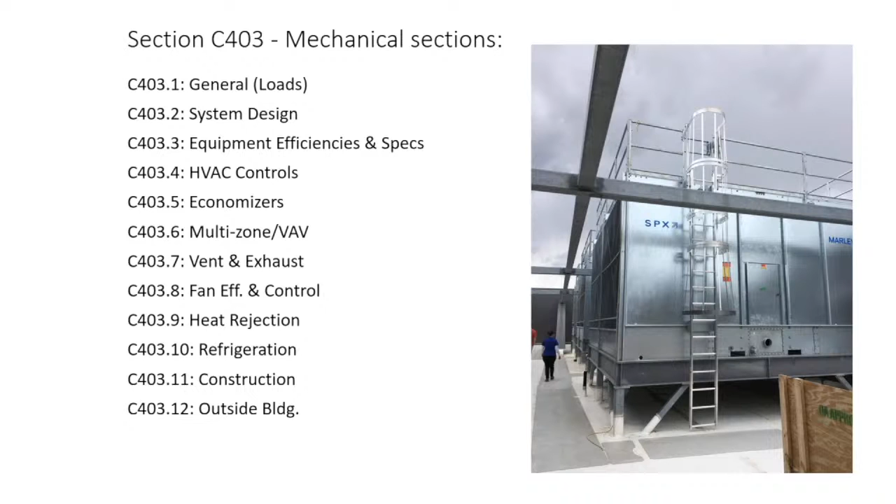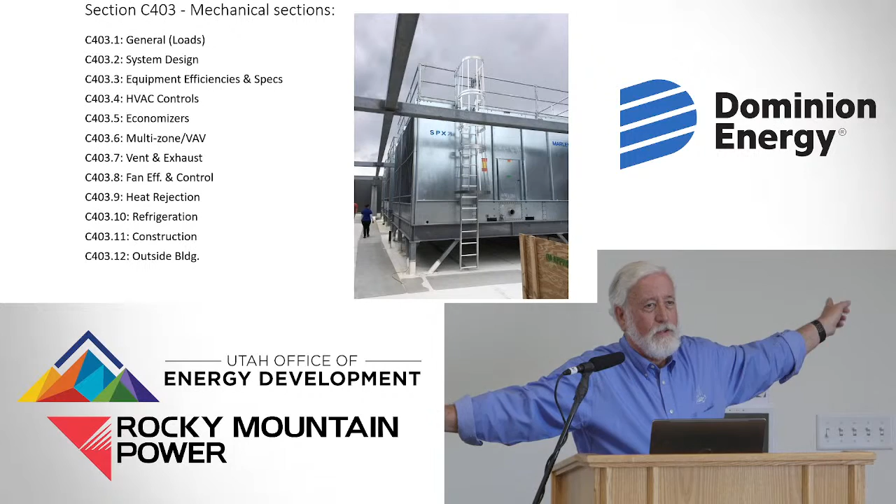And outside the building. When do we heat outside? There's a driving range down here at Mulligan's. Anybody know where that is? Just over here on 104th. I just live up past that. And they have little heaters that in the wintertime you can turn on over those colored canopies. They have to have controls so it doesn't stay on. It has to be a timer or occupancy sensor. We could spend 2 days on that.

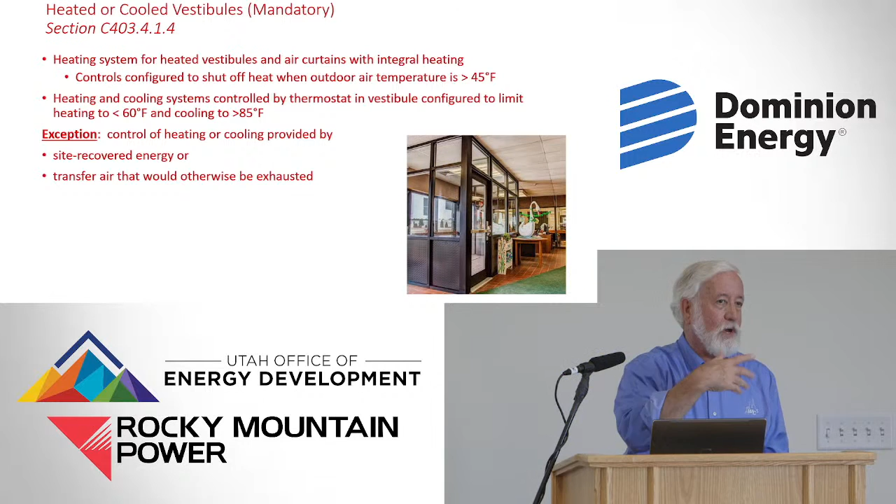New in the code are guest HVAC controls and ventilation controls. We have requirements for walk-in freezers, coolers, all those things. Commissioning, those all apply to all mechanical systems. And we also have new in the code, can you heat and cool a vestibule? Finally been addressed in both. You can, but you have to shut it off when you get to 45 degrees outside as far as heating, and you can't heat above 60 and you can't cool below 85. You defeat the purpose of a vestibule when you start heating it. You know, it's supposed to be a buffer.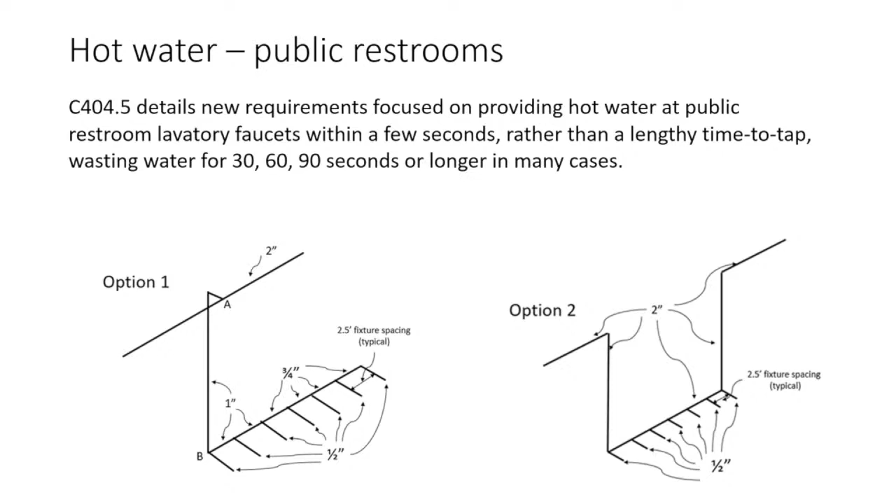We just talked about water. And I wrote an article that's on the website about this very thing, and I grabbed these pictures. You ever been to a big hotel for a convention and go to the restroom and try to wash your hands in warm water, and you never get warm water? That's because they have low flow faucets and they have ridiculous designs in their piping. And some people are really upset about this, but you look at this option 1 diagram on the left, we have a 2-inch line going across, and you probably have a recirc pump on it, so you maintain hot water in the 2-inch line. But then we have a 1-inch line going down, and then it branches off to the 6 sinks or lavs.

I did a calculation on this one, and it was like 100 and something seconds to flush the cool water out so you had hot water down at your sinks. That's never going to happen. And so what the code has identified is you need to limit the length from your source. And so we see down below, I'm sorry you can't see it very well, but you run the pipe down so it's shorter. What's one of the other solutions?

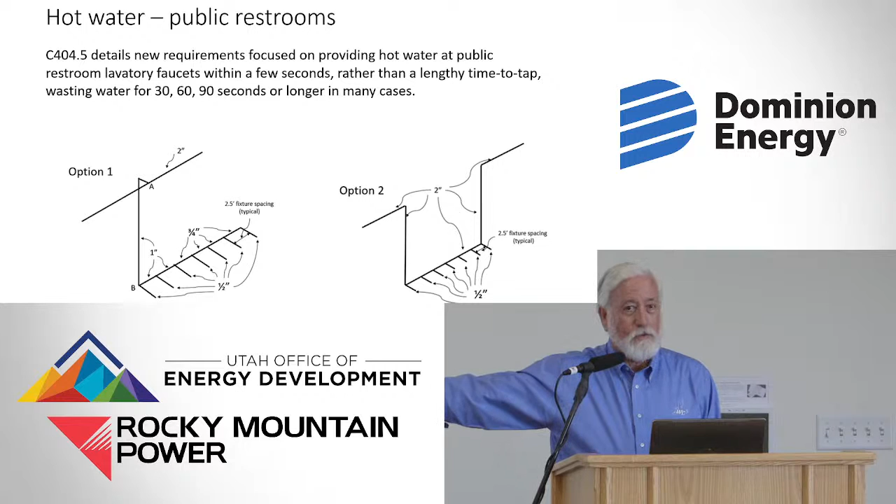And it's probably, when you do your energy model, a better solution: a point-of-use water heater. A little small water heater under that row of sinks, rather than a pump that's circulating hot water through a 2-inch line that's maybe insulated but maybe not very well, and a great big water heater that's holding 200 gallons and everything. How much water do we need to wash our hands? Almost nothing. And so those are some of the things that the code does.

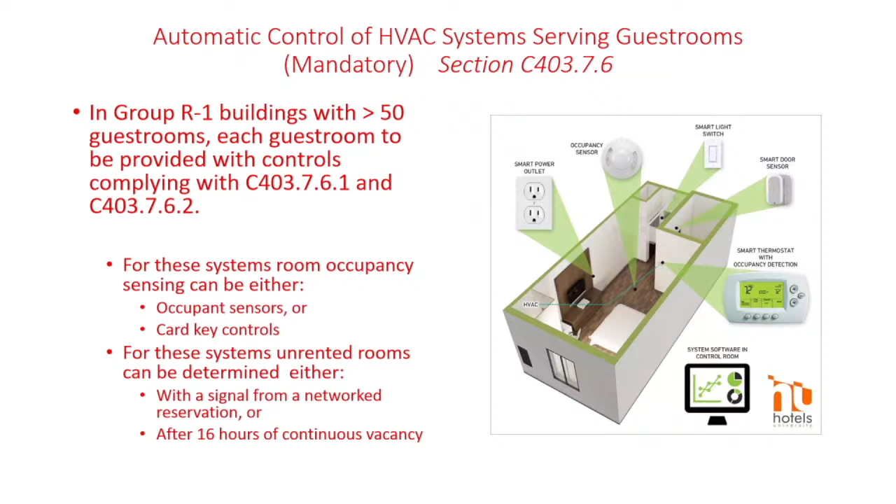How many have stayed in a brand new hotel or motel room lately and had to put the card in the thing to get it to work? Yeah, I just went to Texas a month or 2 ago, and they gave us 3 cards. Here, just put this one in the thing on the wall so it's on all the time, you know, completely defeats the purpose. The idea is, it's not just on the heating, but it's also on the electrical. When you leave, we shut stuff down. So what's in the lighting?

I'm supposed to be done at 1. Close? I'll be close.

We have all these lighting requirements, controls, wattage limits, lighting power allowances, which is just basically how many watts per square foot. Really easy to meet with LED lights. Dwellings need electric meters, and you were talking about that. Exterior lighting allowances, motors and transformers, vertical and horizontal transport systems, or elevators and escalators. You know, escalators now need to have regenerative braking because of, you know, when the elevator's going down and all the braking it's doing to keep it from running away.

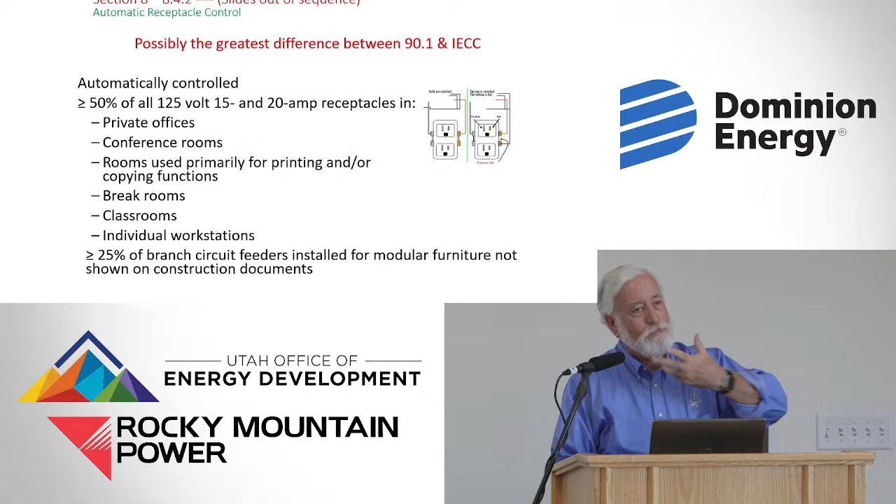So real quick, I'm just going to touch on some ASHRAE stuff. The number one complaint I hear about ASHRAE right now is you have to have 50% of your convenience receptacles switched. So when you leave, it shuts off. You're supposed to plug in your monitors and all that stuff in there, so we shut stuff off when you leave the space. This is in private offices, conference rooms, and so on. And 25% of it's modular. There's a lot of resistance to that. Well, guess what? The 21 IECC, it's in there, so it's here.

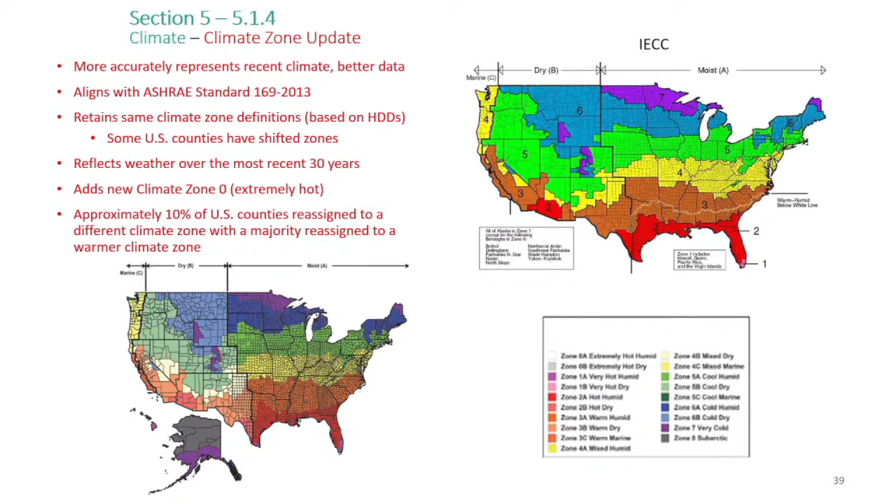We had some changes. ASHRAE changed in the 2016. They're 2 years different than the IECC. And we had some climate zone changes. If you look at Utah, probably can't see it very well, but if you look up on the upper right one, Box Elder County switched from climate zone 6 to climate zone 5, northwest Utah. And we had some changes in Texas, quite a few changes in Texas, and we're probably going to have some more.

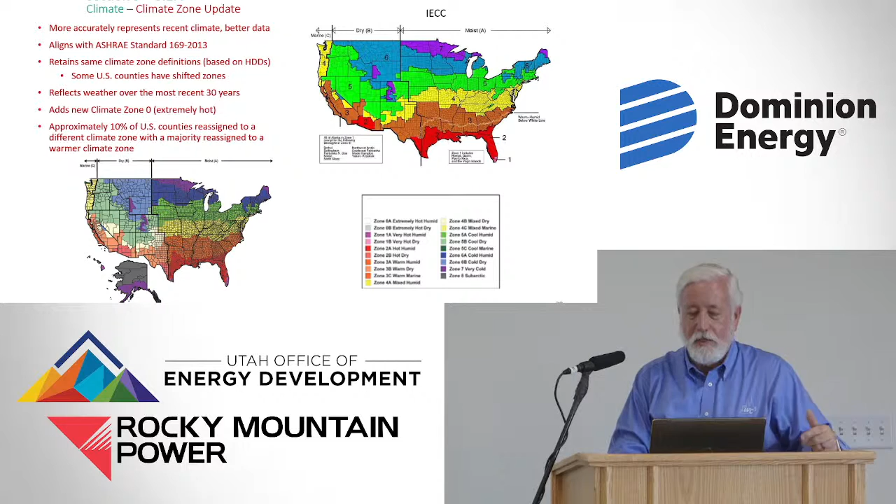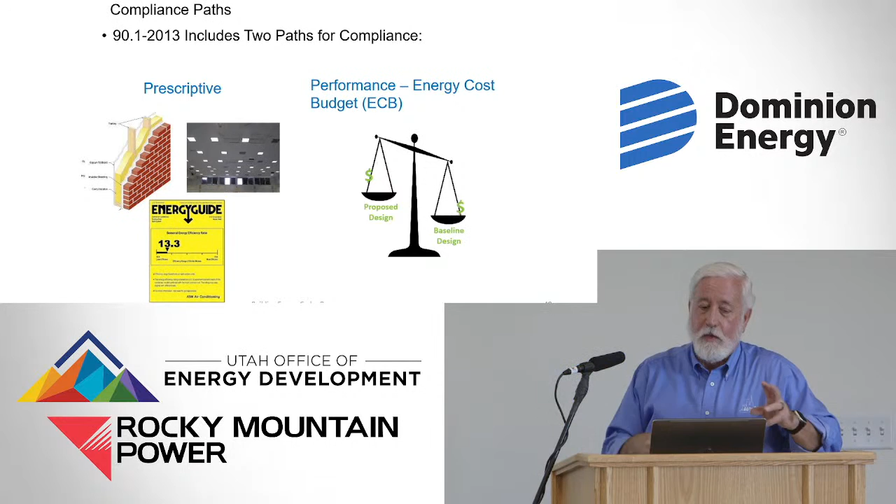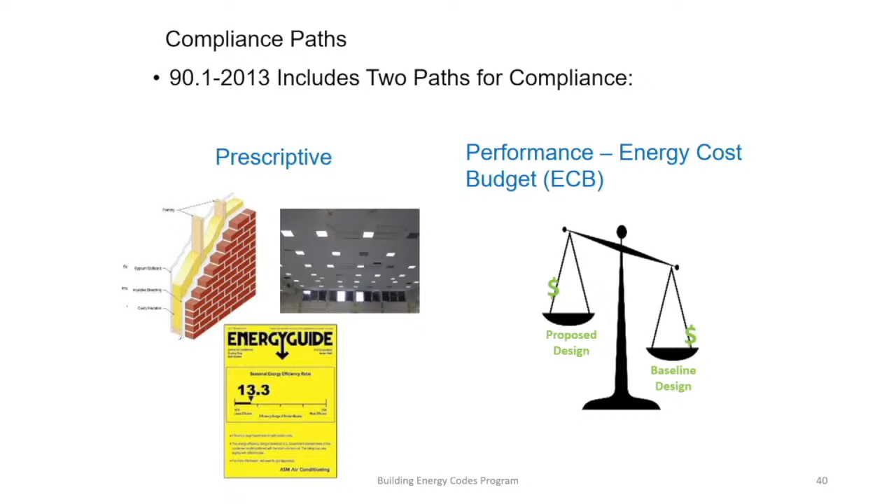So as with the IECC, we have prescriptive where you can meet the tables, or you can do a COMcheck, or you do an energy cost budget, which is, I'm going to call it the early version of modeling. And we do have Appendix G that you talked about, which is a more flexible modeling system, performance rating method, that looks beyond the previous performance modeling. Lots more flexibilities, time saving, encourage creation of tools that automate the simulation process as the market increases. Provides credit for good design practices. So with Appendix G, you get credit for basically anything that impacts the efficiency.

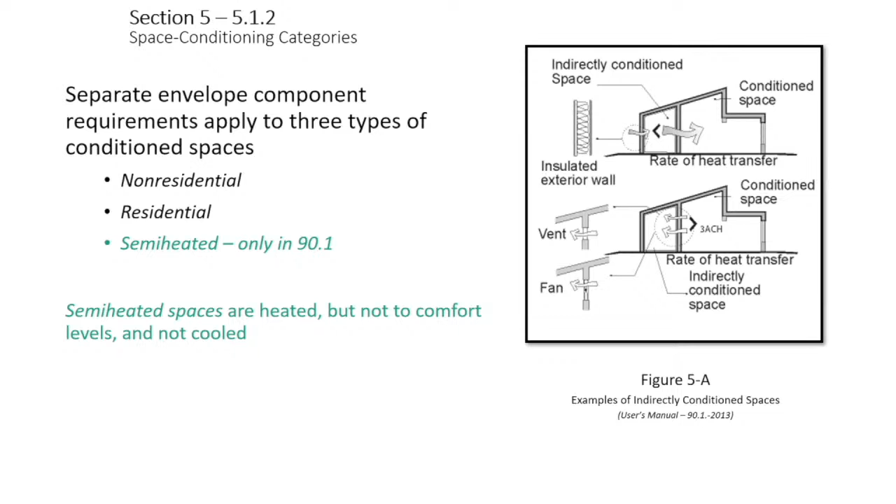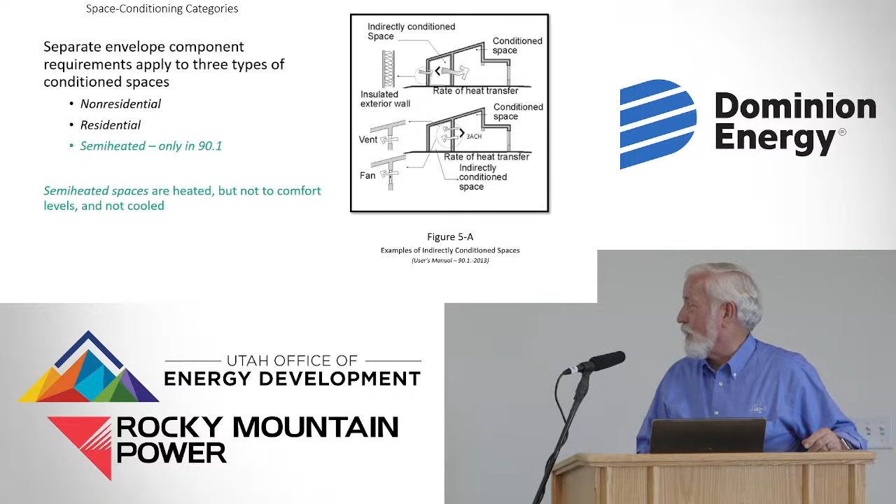Other big thing, and we're just about there, that ASHRAE provides a positive for the builders and the designers is that with ASHRAE, you can have what we call a semi-heated space. So you can have a warehouse building with offices that you have to meet the full requirements of the code, but the back space that you're just tempering is a semi-heated space, and we have reduced efficiency or insulation requirements for that space. So that one's an advantage for big warehouse buildings.

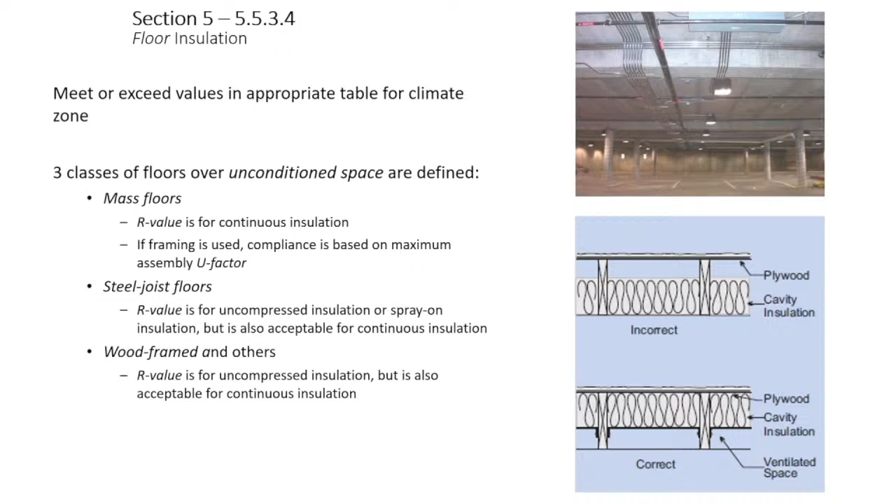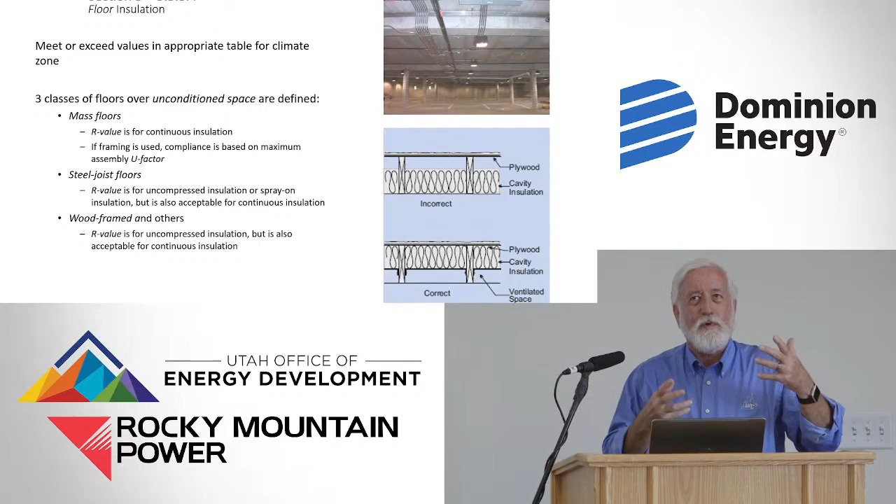So what we have learned, well, we've known it, but we're really starting to focus on, is our air permeable insulation needs to be enclosed on all 6 sides. We're up tight against roof decks. We have an air barrier underneath it. The best way I can describe this is we put on a sweater. If there's no breeze, it gives us warmth. If we have a slight breeze, air movement, what happens? The air goes through it. And how effective is the sweater? The R value goes towards 0. So we need to make sure our air permeable insulation, our fiberglass batts, our blown insulation, all that stuff is enclosed on all 6 sides. We have those air barriers.

And that's it real quick. Any questions? Very good. I think we'll eat lunch. Thank you.